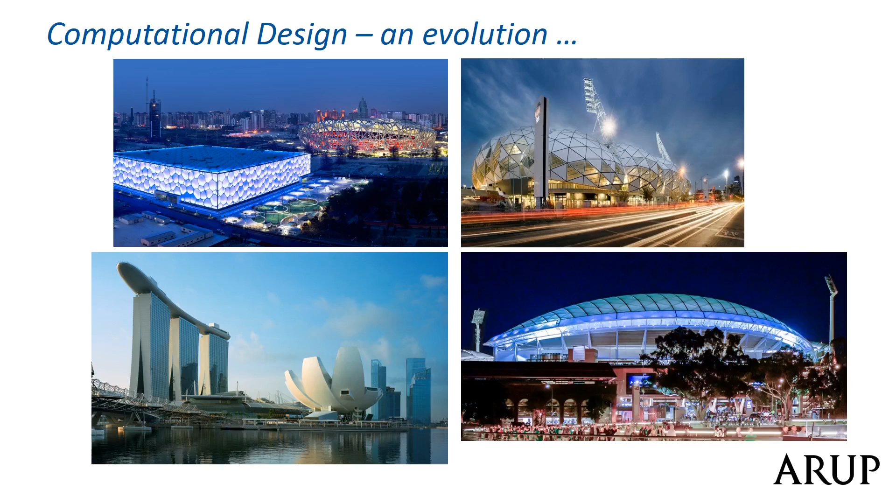There's a couple of themes that will recur through the stories that I'm going to share with you tonight. One of them is that it's just a journey. I've been lucky. This is my 40th year in the industry. I've been at Arup 35 of those years, the bulk of it in the building structure space and recently in the infrastructure group space.

The other theme is that I'm a big believer in, you call it BIM, digital twins, whatever it is. For me, it's all project delivery. We deliver projects. The tool, how you go about it, is semi-irrelevant. But I'm a big believer in what they call human-machine symbiosis. Human plus machine is always more powerful than human on its own or machine on its own. It's a combination of the two: the creativity thinking of the person, put with the knowledge and the power of the tools that you're working with to deliver the projects.

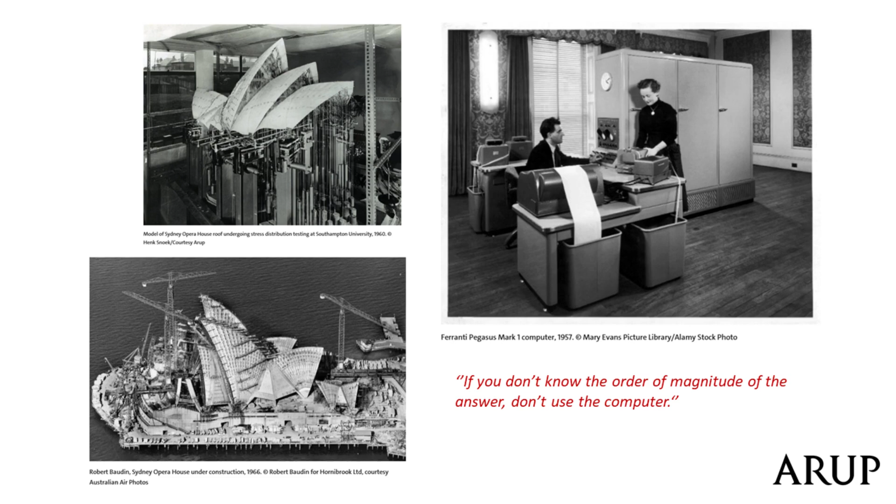So they saw, back then in the early 60s, the vision of taking advantage of the power of the computer to help deliver the Sydney Opera House. And there's a slide up there of the stress distribution testing that was done.

The projects I'm going to talk about are mostly what I consider milestone projects. There's not enough time to talk about every project that we've done, but I do want to give you an idea of the journey that we're on, because I'm a big believer, if you don't know where you've come from, you don't know where you're going.

So this was one of the first projects that we did a 3D model on. For those that are not my vintage, I'll try and explain the why in every project. When this entrance canopy was being designed, this concrete frame building already existed. It was already built. This is a cantilever structure. It's got a backspan truss that had to pull back in between all the existing columns and be tied to the roof.

We had to build a model of that, and then pass it through to analysis to make sure that the geometry fit. And that was the beginning of our journey using 3D tools, and that was in around 94.

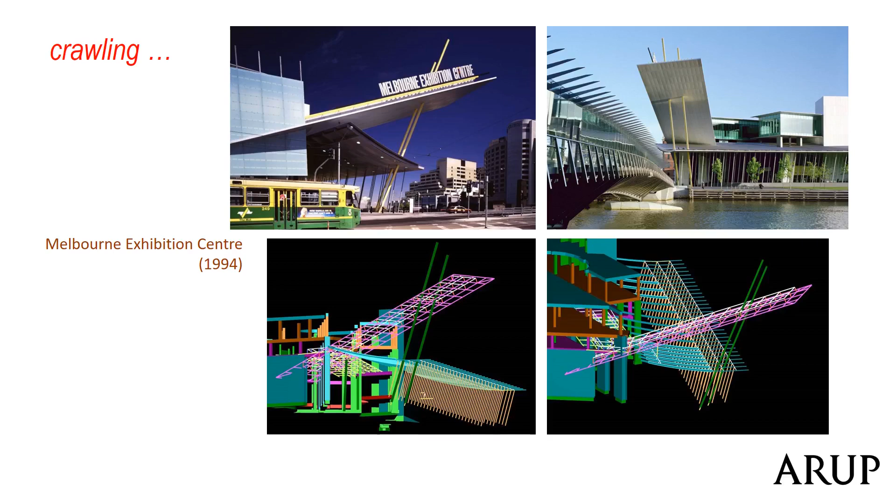Then the National Museum of Australia is one of my favourite projects. One reason being I grew up in Canberra, so this is an iconic project on a very prominent site in Canberra itself. It was also the first project we did where the architect was using Rhino.

It was also another milestone project because in those days a lot of architects did 3D models, but they did 2D CAD files. And at some point the models separated from the CAD files. This is the very first project where we flagged with them, your CAD plan or your elevation doesn't match your model. The architects came back and said the model is correct, we'll update the drawings. This was designed by ARM.

And again, for the same reason, the why. Why did we do a 3D model? It's very complicated geometry. We had to cut slices through the model, produce where the structural columns and beams and trusses need to go. And then again, we pass that on to analysis tools to do analysis with. And that's a common theme that we've used on many of our projects, and you'll see that it's all about building a model, going to analysis, and then coming back and doing the documentation.

In the late 90s, Bentley released a tool called TriForma, which is now called AECOsim. It allowed us to do a BIM model. The same thing that we do today, add data to your attributes, place a beam, column, or wall, etc. Do your reports, blah, blah, blah. It was done in the late 90s. This is a two-storey building, educational building for Victoria University of Technology. We broke even on this project, proved to be a success, and we've basically been modelling every structure in this office ever since.

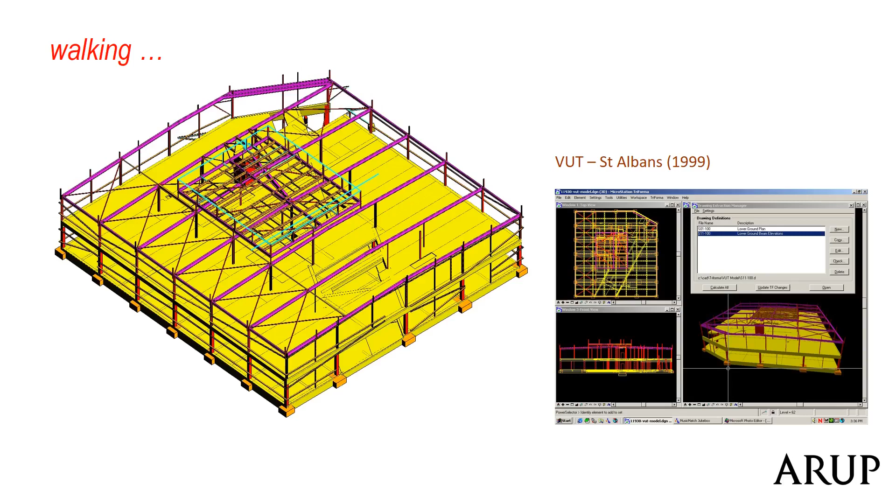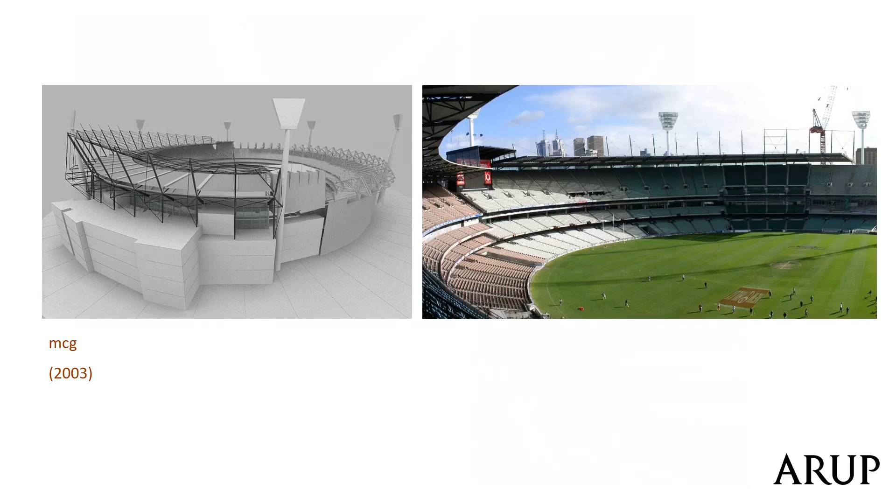Then I'll roll on to the MCG. The MCG was, I consider, a milestone project because we're one of the few disciplines, or the only discipline actually, that used the model to generate the drawings from. But more importantly, this was the first project where we started modelling the steel connections. And again, if I come back to why we do what we do, if a picture tells 1,000 words, what's the value of a model?

At the end of the day, it dawned on me ages ago that we're in the communication industry. We like to think we're in the design industry, we are, but essentially we're in the communication industry. We've got to communicate to someone, either our other design team members, or the client, or the contractor, what it is we want them to do. And a model is the best way of doing that, especially now that we can add a lot of data in those models. So this is the first one, that's the roof node at the bottom. You can see it in the fabrication yard and then out on the side.

And then around the same time in the UK, so this is the late 90s, early 2000s, this is the first time computational design was being used within Arup or within our experience. This was done with Foster's, so the next two projects were done with Foster's. They built a script in MicroStation to generate the geometry. So it's not parametric as we know it today, it's not the parametric tools where you're building a relationship model and you can update it. This is a script that they run, and if you want to generate it again, you wipe the other one and then rerun it. But it generates the same sort of thing.

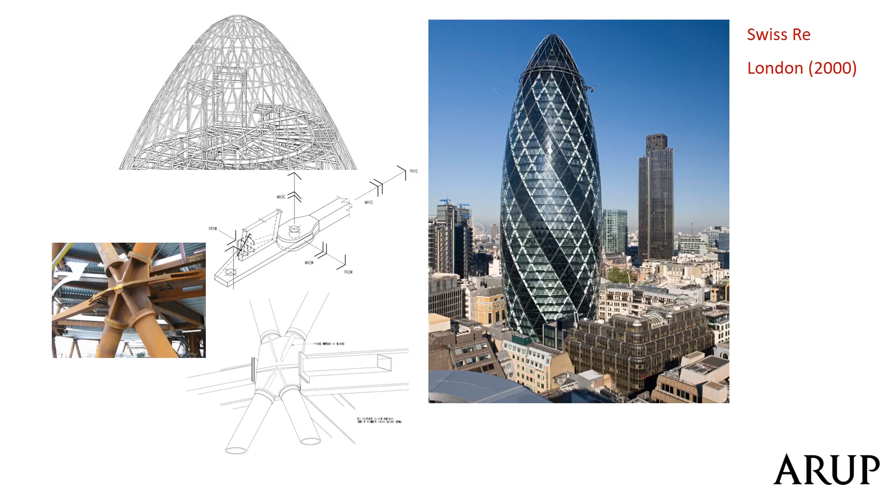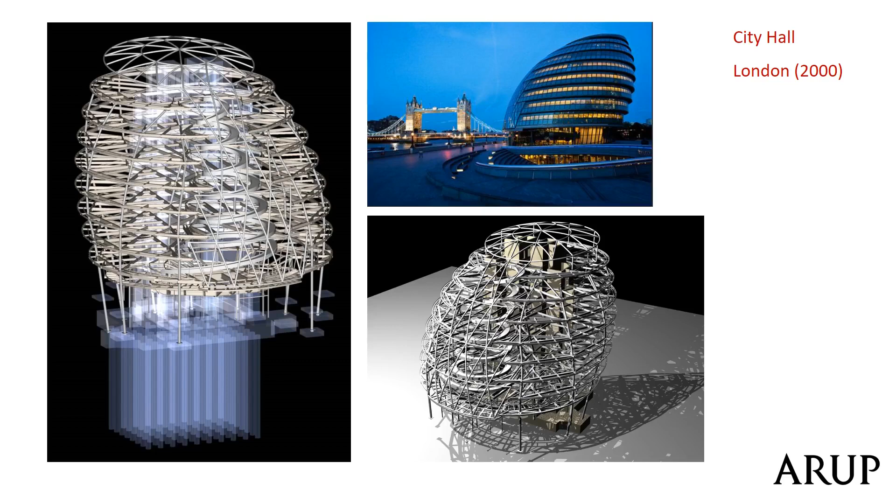The other thing that Arup did at that time was we built a Tekla model of that job. Tekla is a fabrication software. What that allowed us to do is deliver the project early, detail the connections and communicate that with the fabricator. This was done 20 years ago. We're still chasing this in what we're doing today. The next project is around the same time with City Hall. It's done around the same methodology. The scripting was done by Foster's architects, same processes as before, and then we produced a Tekla model within Arup for the same reasons. Again, back to the why.

Then around 2003, the next two projects are around the Beijing Olympic Games. We were lucky in that Arup won quite a few of those games. This is done with Herzog & de Meuron, if I pronounce that correctly. This is our first project that I'm aware of that we've used a parametric tool. And the parametric tool used on this project is CATIA. CATIA is a product that's been around since the early 90s, developed by Dassault. It's used by the aerospace industry, mechanical and other such things. It's a very powerful tool.

And also at the same time, there was a guy at Arup who's unfortunately no longer with us, John Parrish. He was a sports architect. He spent most of the 90s writing code to generate the optimal design for the stadium bowl seating. Because basically every stadium is set around the bowl: what your sight lines, your distances, your viewing angles are. That pretty much defines the criteria for a bowl. So John Parrish wrote a lot of scripts and coding before he then went into the parametric tools to be able to regenerate bowl seating arrangements, 50,000, 60,000, all that sort of optioneering.

Then the roof structure itself, as I mentioned, was all done in CATIA. It's quite busy, but really it's a fairly simple project. These are portal frame trusses, and then the rest of it is just placed there so that no one can read what the structure's doing.

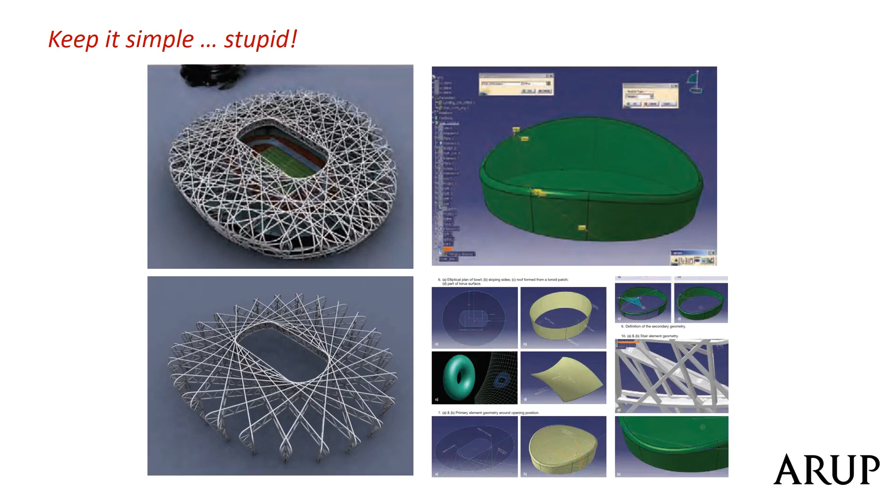CAD, because CAD is used in the mechanical industry, you can generate your geometry and then create true or developed shapes, which is what they did. So they produced the drawings out of CAD, and they could generate the true envelope of the steel plates. They did a lot of prototyping with the welded connections there. You can see that there. They proved that it worked. Once they were satisfied with it, then they ran with it through the job.

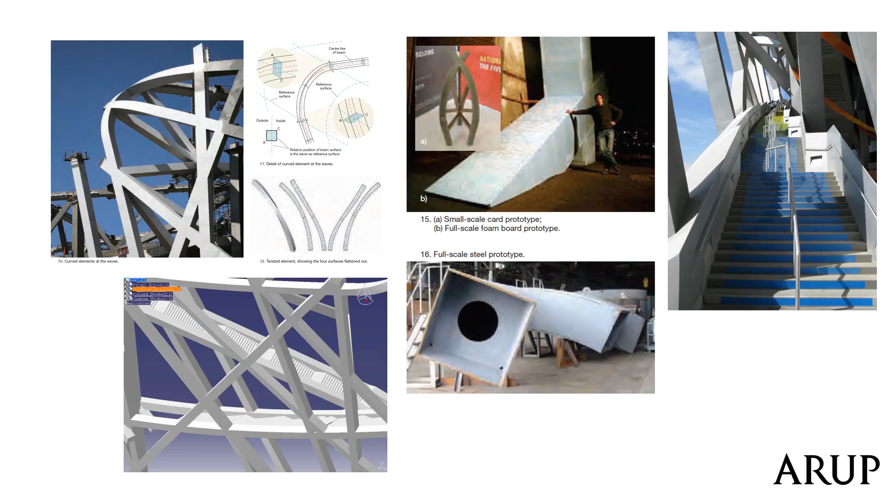And again, the same challenges that we have today is that these tools at that time allowed them to play around with all those options. The Water Cube. The Water Cube was done by a Sydney office by Steve Downing and his crew up there, for those who know. Again, this competition, this was done with PTW in Sydney, and they won the competition in 2003.

The geometry behind it is quite clever. Soap bubbles or bubbles is quite a strong structural form. They took the concept of bubbles within a foam environment, and they cut it at an angle, a slice through it. Then they had two skins, one for the outer skin, one for the inner skin, and then the bubble lining itself is made out of ETFE, and it was pumped with air. So it was actually a way of creating a structural frame, both inner and outer, but also acted as the insulation for the heating and cooling of the building.

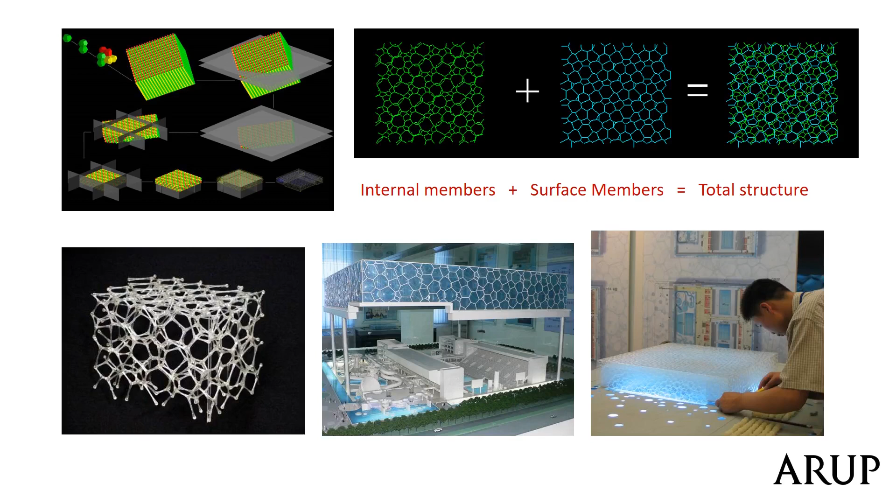You can kind of see there, it was early days, but they created a 3D printed model, and you can see quite a lot of the model there. Very impressive. Now the workflow, again, this is a milestone project for us because they did a lot of coding. All this was done in MicroStation. They linked it to analysis, and then they brought the analysis data back into a MicroStation model, which they automatically generated the drawings on. What this allowed them to do was quickly turn around a lot of different options.

Again, it's not a parametric model in that it's linked, but it's done through scripting. So you clean the model, redo the script, create your drawings, look at your options. So you can kind of get a sense for what it's doing. The optimization routine that they developed for this, so an optimization routine is an iterative process that runs through all the members to try and refine the design down to as optimal as possible. This optimization routine is still being used and is being rolled out into a lot of the projects that I'm going to show you after this.

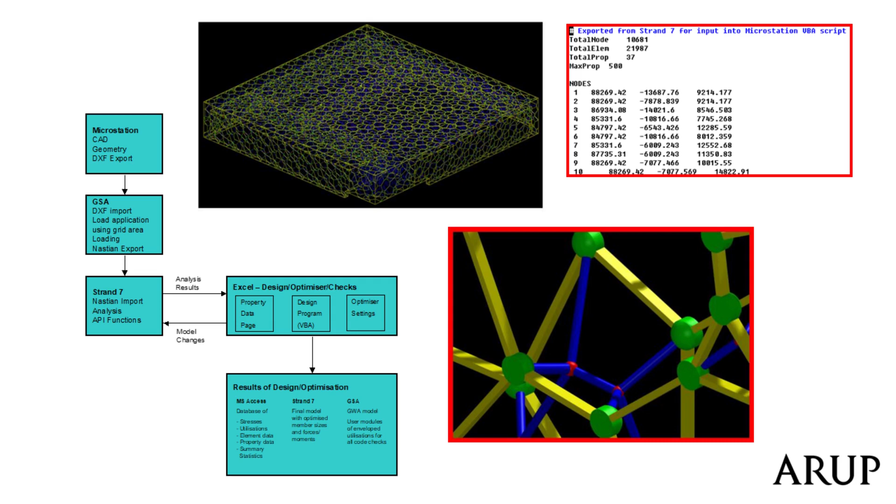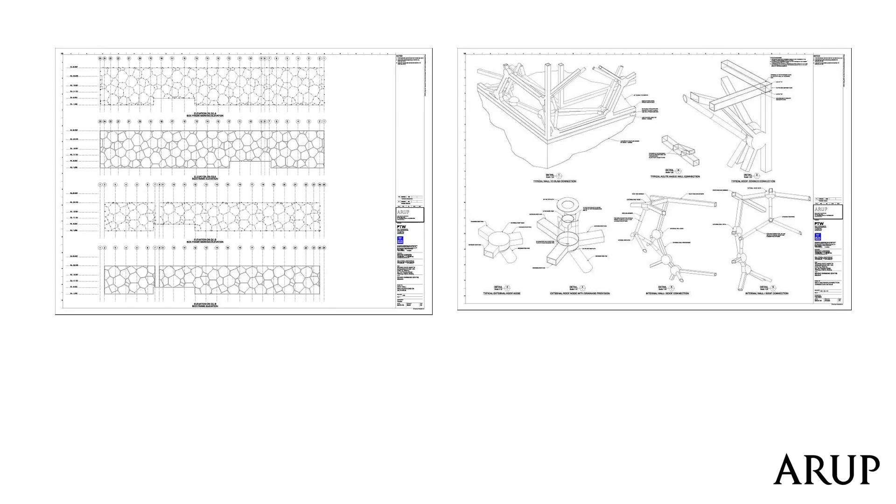So again, I'm trying to emphasise that where we are today is on the back of what was done before. We just keep refining and improving it. That's some slides and scripts. It's also, again, the value of having the data or the model. You can pull that data out and start doing some testing and studying on it. Some examples of some drawings, just some images of the project on the site.

The next one, this is Marina Bay Bridge, double helix bridge, done out of the Sydney office again by Steve Downing and his team. This is the first project that we used a proper, what I call a parametric tool here in Australia. It was done using Bentley GC, which was released about 2004. This is a double helix bridge, but effectively it's designed as a tube. A lot of the optioneering was done in CATIA, form finding. Then when it was rolled out to project delivery, it was delivered using Bentley GC. There's an image on the right there of the GC noding, which, for those that are familiar with Grasshopper, is a very similar sort of context.

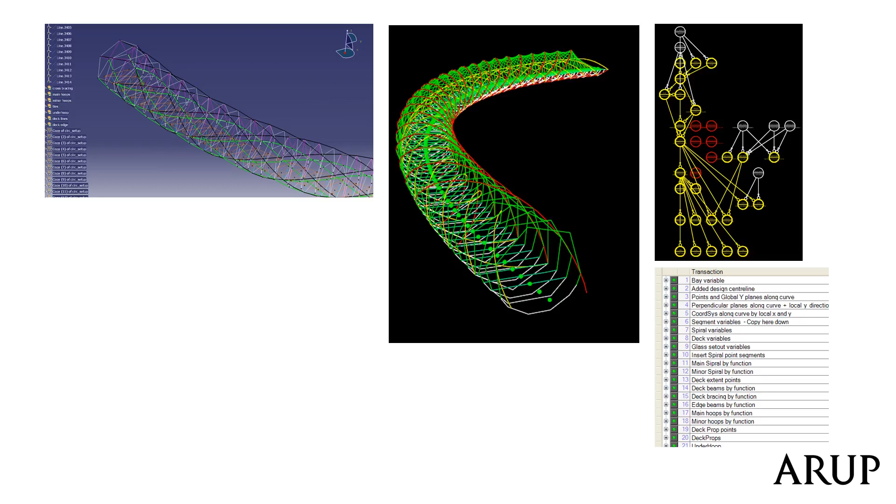I think the best description of these graphical or visual programming tools is relationship modelling. You're building a model that has a relationship between 2 points, which when you connect them, it could be a beam or a column. Geometry starts to become irrelevant, where the X and Y and Z you can plug in later, but you're just capturing that relationship between all those objects. And then when you build on that, and build on that, you get the powerful tools that we've got today.

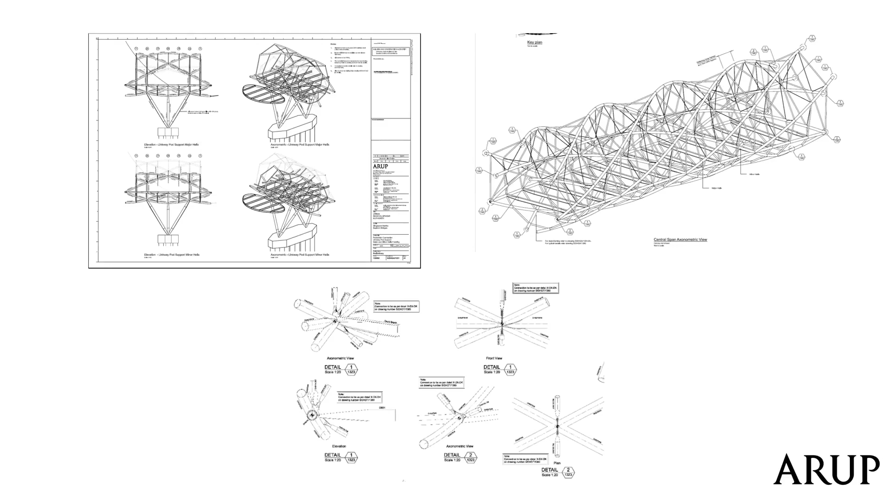Just some images of the different geometry options that they explored, and then the model that was used for documentation. Same sort of concept, and again, this was done back in 2004. 3D steelwork connections, as you can see. And then, like today, take data out of the model, start doing reports, doing your comparisons, blah, blah, blah. All the stuff that we kind of take for granted.

AAMI Park. I'm a sports tragic, so I've been lucky enough to work on a lot of stadium projects. I also played rugby as a kid, so big fan of this project. It's the first project we did here in Melbourne using GC. Again, the early concept work was done by Dominik Holzer, for those in the industry, at Melbourne Uni. He was a PhD student with us at the time. He did a lot of the concept and form finding, working with Tristram Carfrae in Sydney.

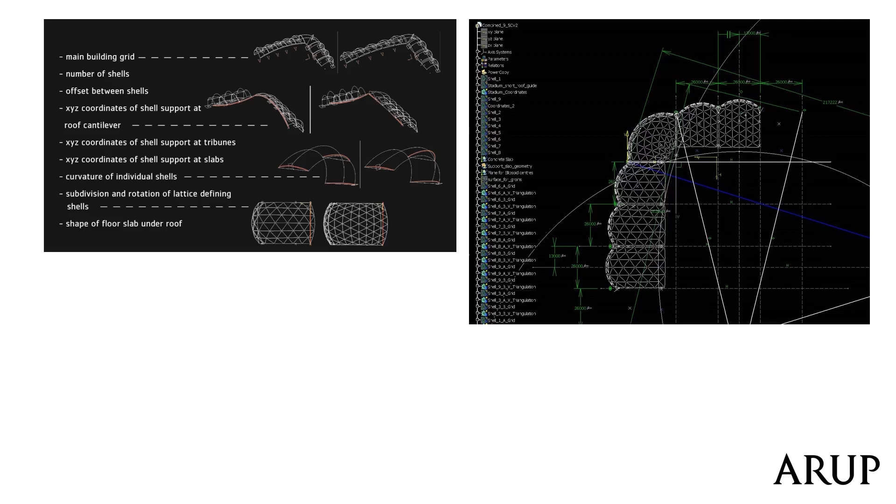When it came to project delivery, we brought it into GC and built a parametric model for 2 reasons. Why? We wanted to run some optimization studies for the geometry, but mainly we also wanted the ability to pre-camber; all steelwork structures have a pre-camber. Every node is connected to another node, so when we wanted to raise the lip of the roof to hand over to the fabricator to do their steelwork shop drawings from, we wanted the ability to raise that roof quite quickly. So we built the script that allowed us to do that.

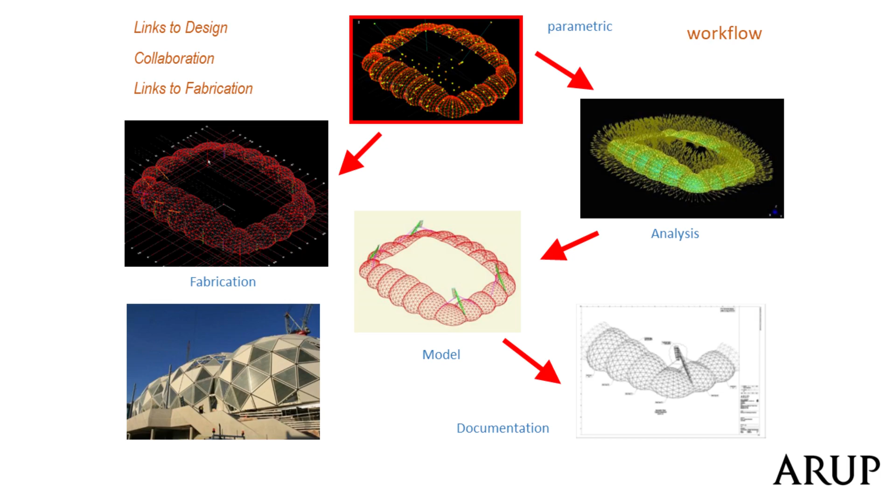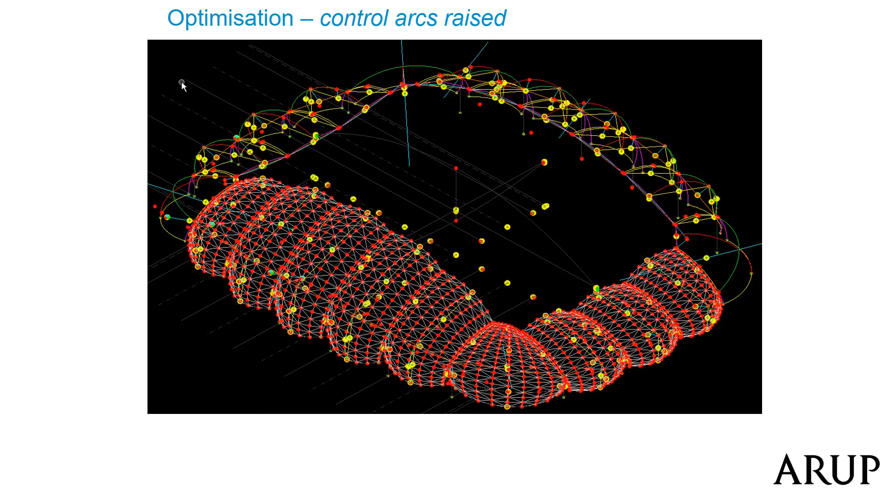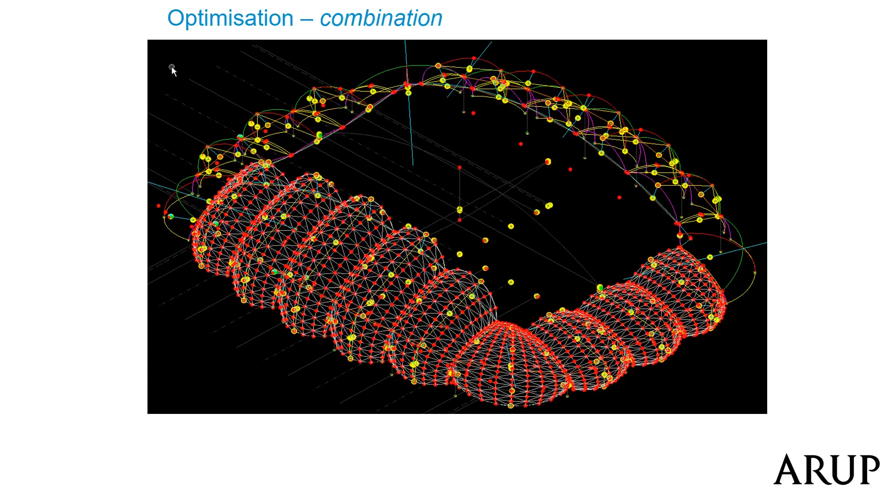Some examples for those that haven't seen parametric tools used, I've just done some exaggerated slides of playing around with the different geometry. So you've got the shell raising, the individual shells being raised, and then a combination of both. Having that allowed us to run all those different options and spit out a text file, which we could then map. We had a programmer map it to the analysis tool, so we could spit out 18 different geometry combinations in minutes, and then the analysis would run overnight. We'd make a comparison of those things, and then run another case study of the best combination of both.

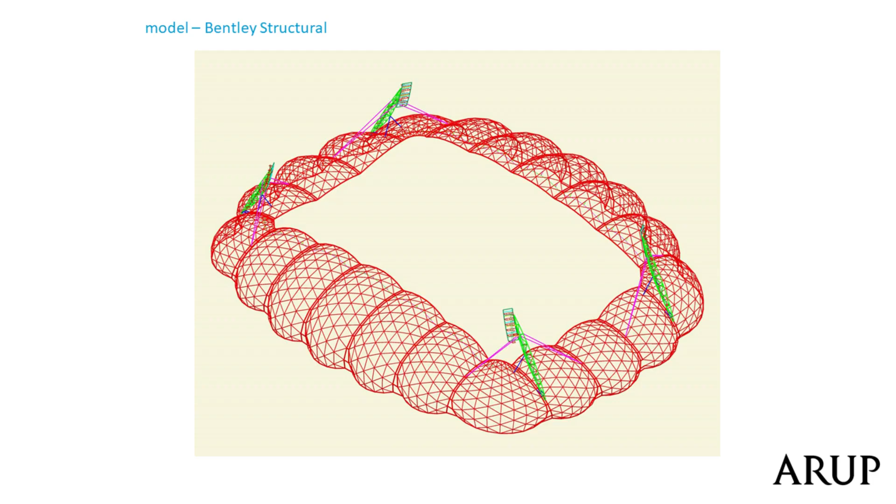So that's an image of the analysis model, and then this is the Bentley model that we used for documentation. Same thing. And then we handed over the preset model, gave it to the contractor and the fabricator to start working from.

The next milestone project is Marina Bay Sands. This was done in conjunction with Moshe Safdie Architects. It was one of our first global projects. It was 3 55-storey towers, convention centre, theatre, ArtScience Museum. A lot of the optioneering was done parametrically and done here in Melbourne. When it came to detailed design, it was done out of the Hong Kong office, the Singapore office, of course, and the ArtScience Museum was taken to construction here.

I'll go back to this model. I still say to most people, if someone walked in today and said, can you do this today and do all that fabrication-accurate model to give over to the contractor, I kind of go, holy hell, how am I going to do that? And this was delivered back in 2007. All the steelwork on this project was handed over to the contractor for the fabricator to just finish and do the shop drawings. All the geometry was set out in our models.

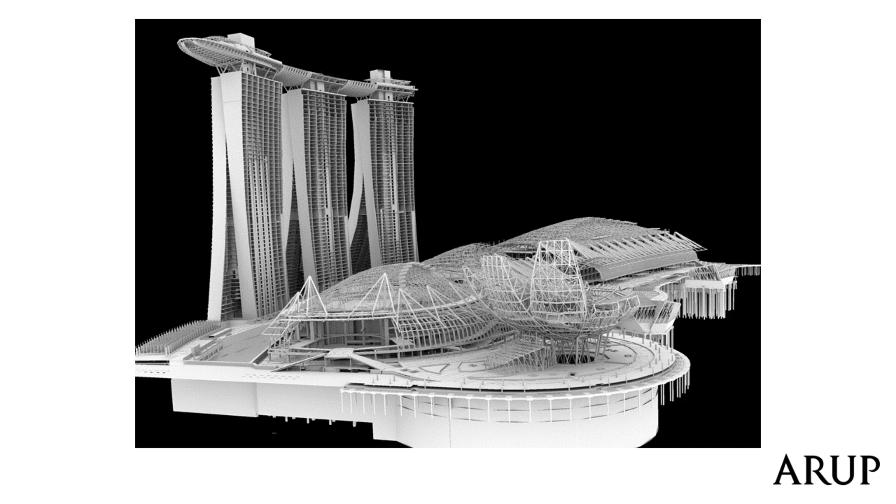And the main reason, if I go back to the why, was this project. The ArtScience Museum, which we did here, was fully parametric. Again, a couple of reasons why. Imagine trying to do a set-out drawing or convey that information to the shop detailer. Can you go build this model if you don't give them a model? It wasn't possible.

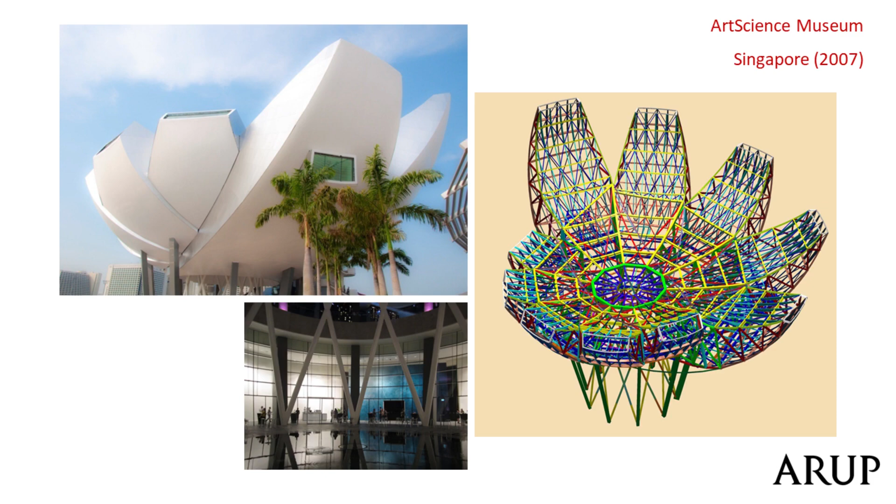When we started this project, just some more images. Basically, that's 10 storeys high from the base of the diagrid to the palm of the lotus. So it's 60 metres in the air, or 30 metres in the air. This was the concept we were given when we started this job. Jim Pay, for those in the office, is a guy I worked with for a long time. This is one of his first jobs. He had oranges and a banana, and he decided that the lotus looked like that. This was the sketch that we started with.

We had 3 months to go from that sketch to a full model, design analysis, and go to tender. And then we had another 3 months to refine that model and then hand it over to the fabricator and say, go build this.

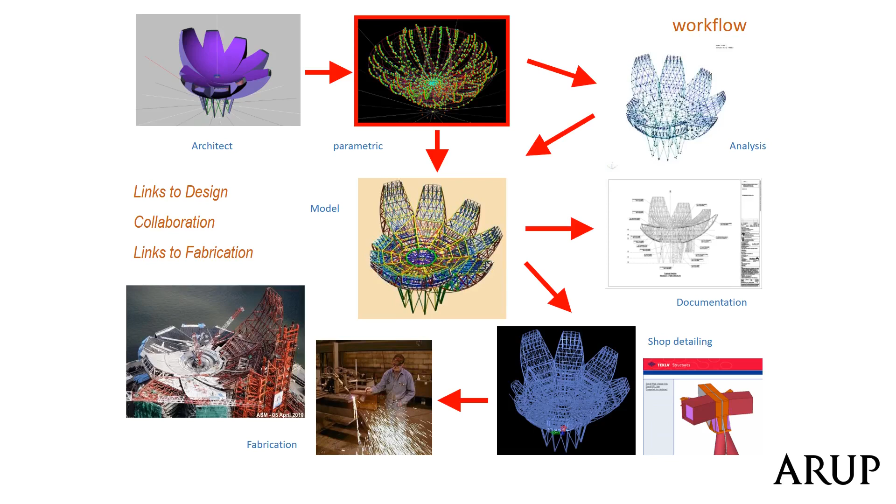Quite a challenging thing. We built a federated, back in the day, GC, Bentley GC's, it was 2 gig of RAM it could run on, and then it would crash. So we basically had to do the whole thing in federated scripts, essentially. So we had a script to define the primary geometry, then a script to do each finger, then a script to do the diagrid, and then etc., etc.

The beauty of the scripts, as you hopefully all know, is you write a bit of code or you write a script, you prove the logic for one, and then you can reapply it on the 10 fingers or the top of the model surfaces or whatever. So it's quite repeatable.

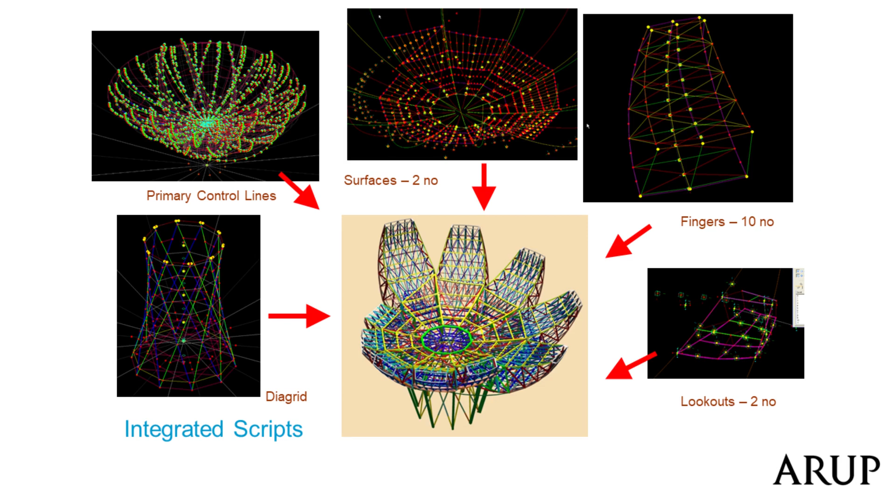The architect developed all their geometry, they did everything in Rhino, even all the drawings. It's probably the most perfect Rhino model I've ever seen. Had the tiles in there, finishes, handrails, the whole caboodle. Very proud of this job. These are some images of the federated scripts and then the combined model. Some images of the architect's model, the analysis model, the Bentley model, and then some of the drawings.

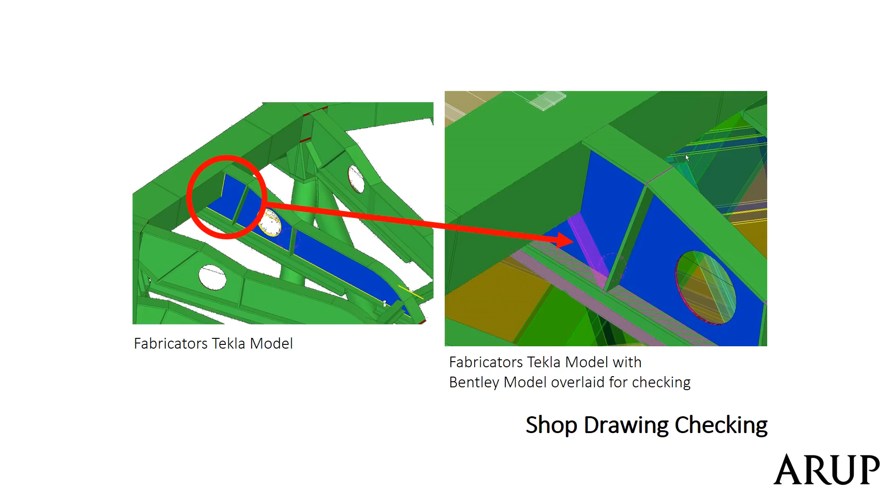Obviously, we went through a lot of design iterations with this project. And then what we did was we went from Bentley over to Tekla, handed over a Tekla model. The beauty of handing over a Tekla model to the contractor, and we've still come back to that thing today, is that when we get their model back, we can easily run comparisons. And it saves in shop drawing time, saves in review time, etc. So there's huge advantage in that, and that's something that we're still chasing today. Some examples of the construction and the final product.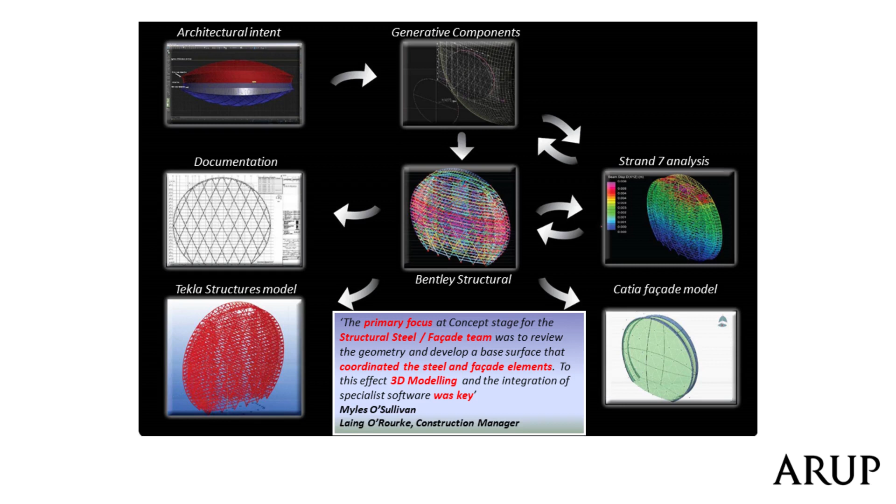Now I'll talk about a couple of other projects. So this is Aldar HQ at Abu Dhabi. Similar sort of workflow, going into 2008. GC model to define the overall geometry, take it to analysis, from analysis to a Bentley model, from the Bentley model to a Tekla model. The Tekla model was handed over to the fabricator with connections. And the facade for this project was done in CATIA. And that's 12 years ago.

Just some examples, some of the drawings, some of the Tekla model. Same logic as Art Science Museum, being able to compare the model with the model you get from the shop detailer.

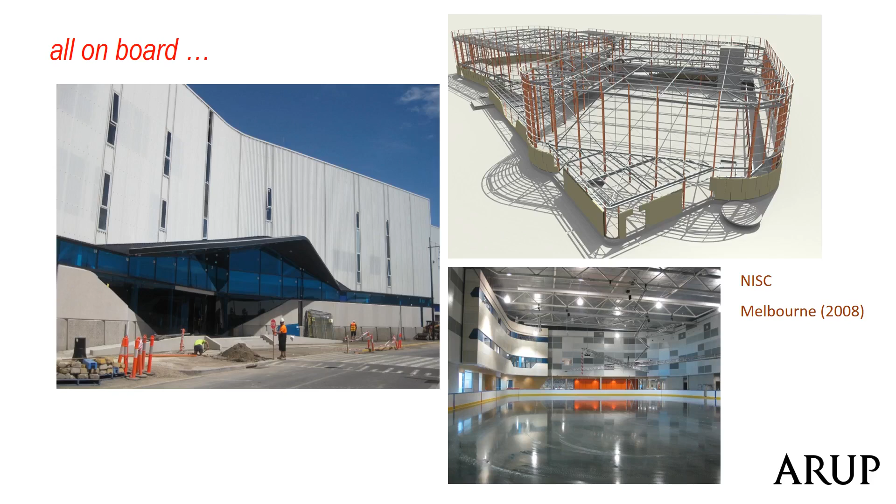We built a parametric model because the project was awarded in November 08, and then it had to be delivered in 15 months' time. We had to start design and hand over a model to the shop detailer so they could work on it over Christmas, so they could put piles in the ground and erect the columns in March. So when we started this, we didn't know what the truss framing arrangement was, what the column sizes were, any of that information. It was early days. So again, we worked on a relationship model, we built that relationship, and then when we got that data, we were able to put that into the model and turn it around.

This was also the first time that we were able to model. The tools allowed us to model the objects, beams, columns, walls, using the parametric tool. Previous to that, we were running scripts in-house. We'd written code to be able to pass from one tool to the other.

Then I'll roll into Adelaide Oval. Again, I'll talk about milestone projects. This was done with Cox Architects. So you can see, hopefully, a lot of that early work was done with CATIA and Bentley GC. Grasshopper was released around 2007, 2008. Architects started using it. Our engineers started using it more. Engineers take to Grasshopper like ducks to water.

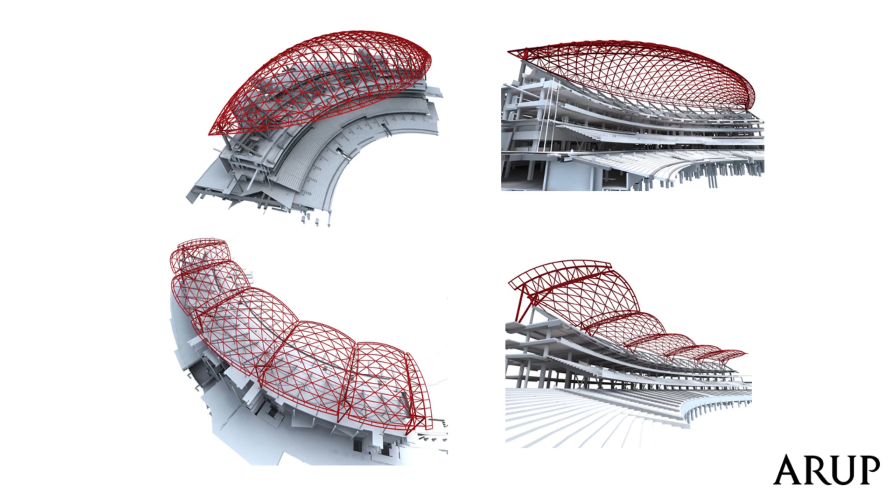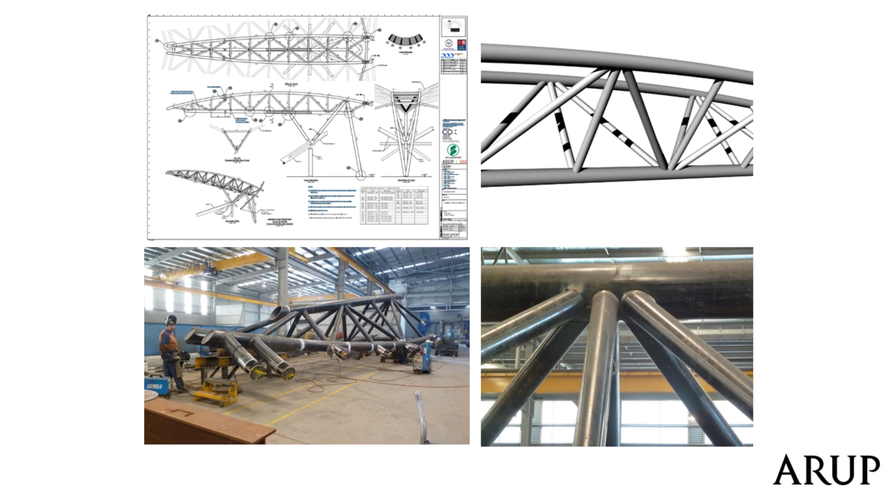Just some slides of the two roofs. Again, all of them done parametrically. Some examples of just some of the drawings and the fabrication. The other thing I wanted to mention, all those optimisations from the Water Cube went through AAMI Park, and then onto Adelaide Oval, and were reused on Adelaide Oval. Just some more examples of the model, the drawings, and the fabrication.

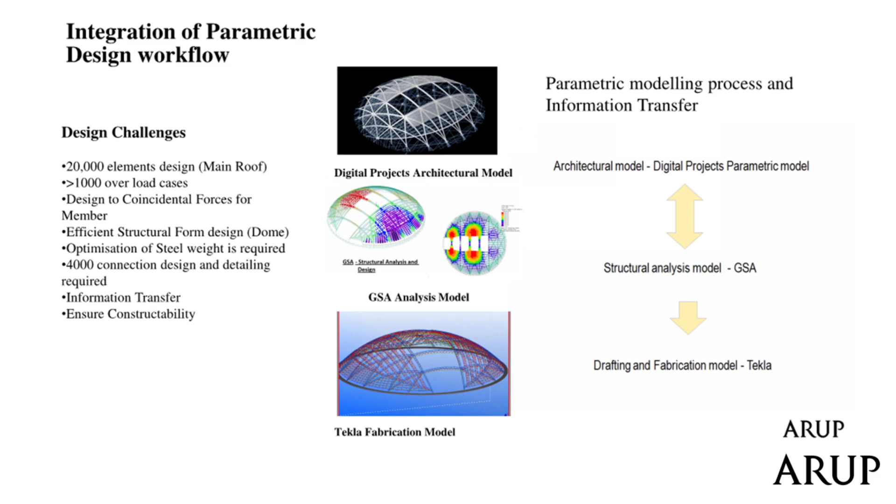I'm going to talk about the Sports Hub. This is the last kind of old project that I'm going to talk about. The Sports Hub was done using Digital Project. Digital Project was developed by Gehry Technologies, which is obviously part of Gehry's architectural practice. It's based on CATIA, so it's an engine that runs on CATIA. Arup have used it on a lot of projects, Sports Hub being one of them.

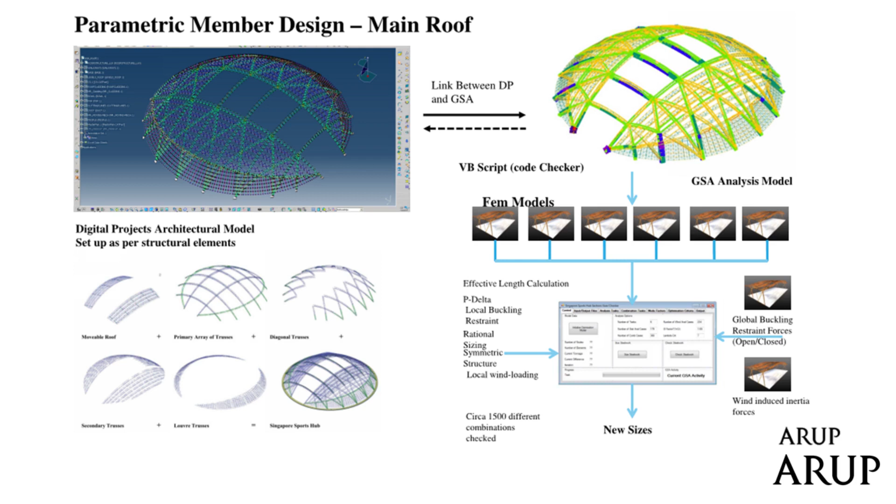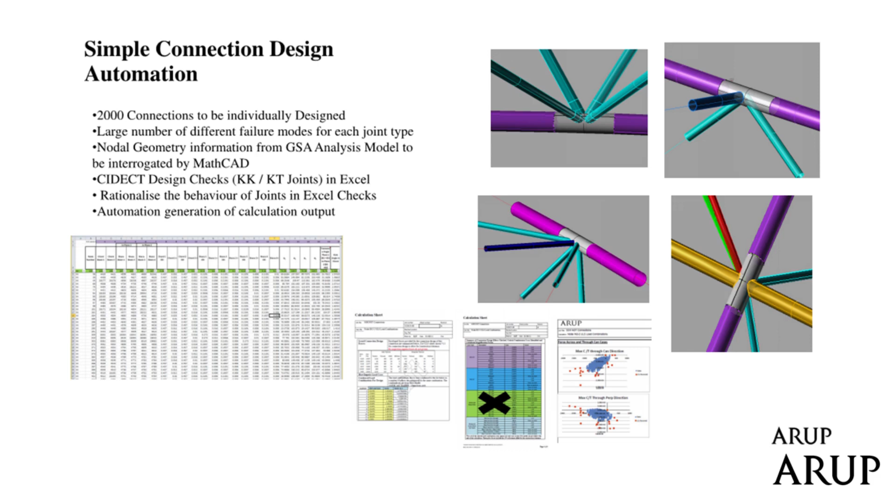So again, similar sort of workflow: parametric model, take it to analysis, from analysis to a Tekla model. Just some more images showing the workflow. And then we did a lot of studies with rationalisation of the connections and also the member sizes. And again, that same optimisation tool was run through here. This is something that we're still chasing today, and hopefully Rhys and Josh might talk about that. Just some more examples of the analysis for the connections.

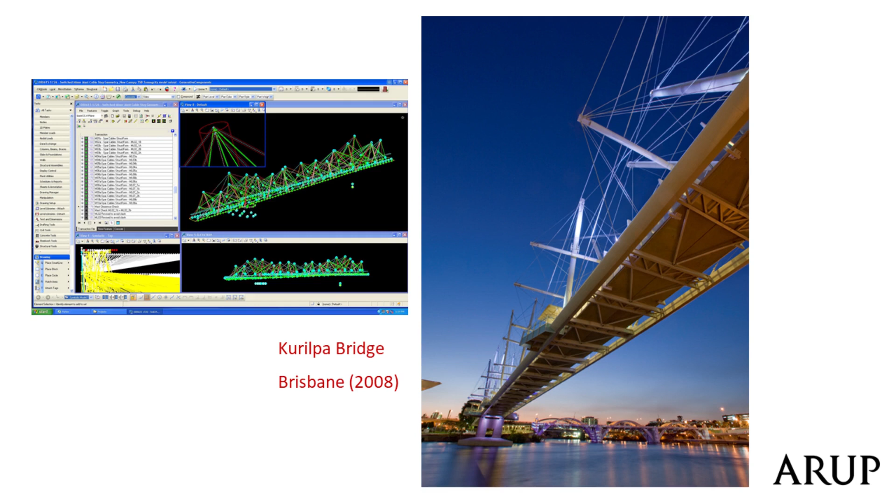Again, why did they use a parametric model? Because they had to play around with the geometry of the masts and the cables to make sure that they got clearances and didn't clash, etc. Again, passed to analysis. The next project I've shown because a lot of the projects I've shown are stadiums or what you might call sexy projects. This is 2 kilometres of piled retaining walls done in 2008 for a project with John Holland, a grade separation project at Nunawading Station.

You build the script, you tie it to the rail alignment, you tie it to the existing ground. We didn't get the information from the geotech until one day before we actually issued drawings. It was an accelerated program. So you build the logic in the script first, then when you get the data, you push the data in, which allowed us to push out the models quite quickly and then generate the drawings and the schedules. This program ran ahead of schedule and was very successful.

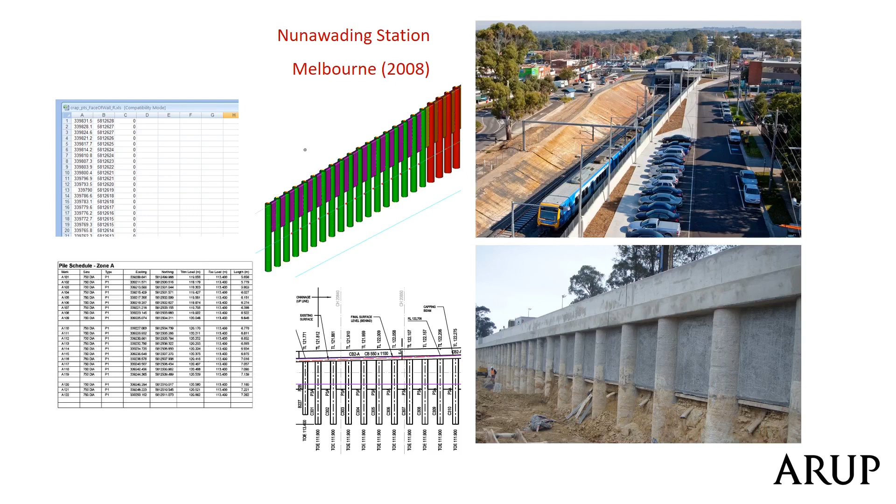So I try and push the message that these tools aren't just for your special projects, they're for every project. You can take advantage of it. We did some tunnel studies for the Airport Link in Brisbane in late 2008. Fast forward, we've got the Elizabeth Quay Bridge done by Clayton here in Perth, Grasshopper to Tekla, same sort of workflow: to analysis, Tekla, and then drawings. In recent years, I'm just going to talk about what we've been doing since with the bridge team, which is Swan Street Bridge.

This is my first bridge project, I guess. Obviously get a nice easy job to start with. It's got 76 steelwork fins each side of the bridge, 152 in total. The concept, the architectural concept, is a little bit like oars in the water. Their length varies and their depth varies based on an algorithm that the architects came up with.

The road geometry and the shared user path geometry kept changing, so we tied the geometry of the bridge and the fins to that geometry, so when we could deal with those iterations, we're also able to generate all the data that went to fabrication out of the model.

It was also one of the first projects where we used a point cloud. Melbourne Water were quite insistent that the new arches that were put in match the profile of the existing arches that were removed on the outer edges of the original bridge. All the geometry on this bridge was done parametrically. All the set out information was extracted from those models.

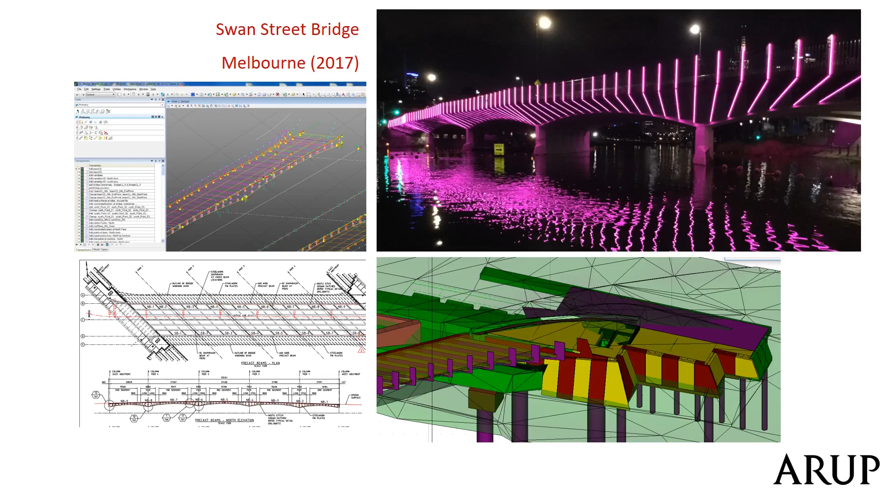Probably something I haven't mentioned, if I go back to the why with Arup or with OVE, is it's all about delivering what we're doing. I'm not a big believer in spinning wheels for the sake of spinning wheels. We use these tools to be able to help us deliver a project.

So in recent years, I've been on the Western Program Alliance for the last 18 months. We've basically, in that time, been able to change how we go about what we do. We're now doing all of our bridges parametrically, generating all our drawings from the model and generating data from that model. We've delivered to detailed design 4 bridges so far. 2 have completed construction, 1 is under construction and 1 is about to start construction.

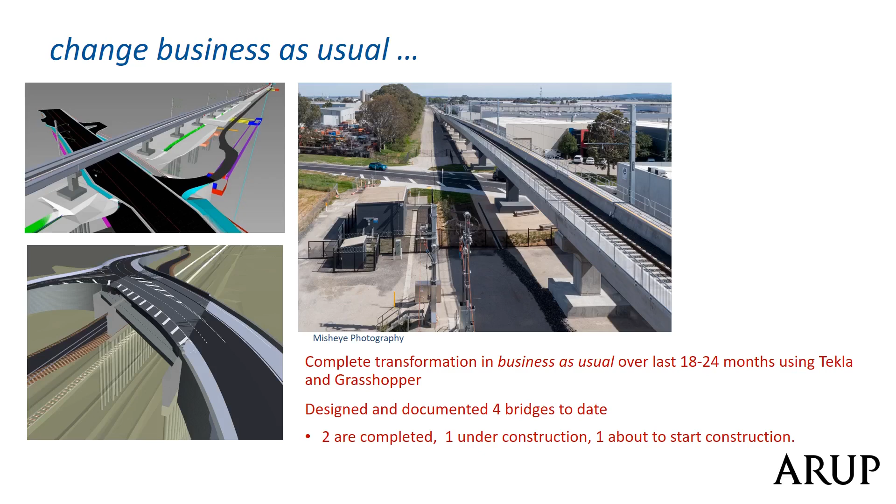Last year for us was a lot. I'll go back to, so this is the first project and the second one. And these are completed. Just some slides. Why parametric? For the same reason that we did it in buildings, because we extract the drawings from it, we extract all the set out data. It helps us deal with the iterations that happen through the design process. The same logic that we use in the building space.

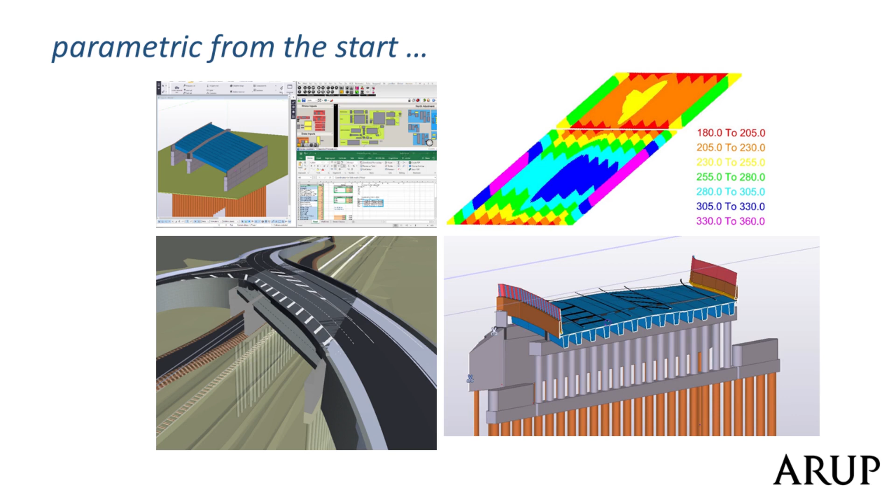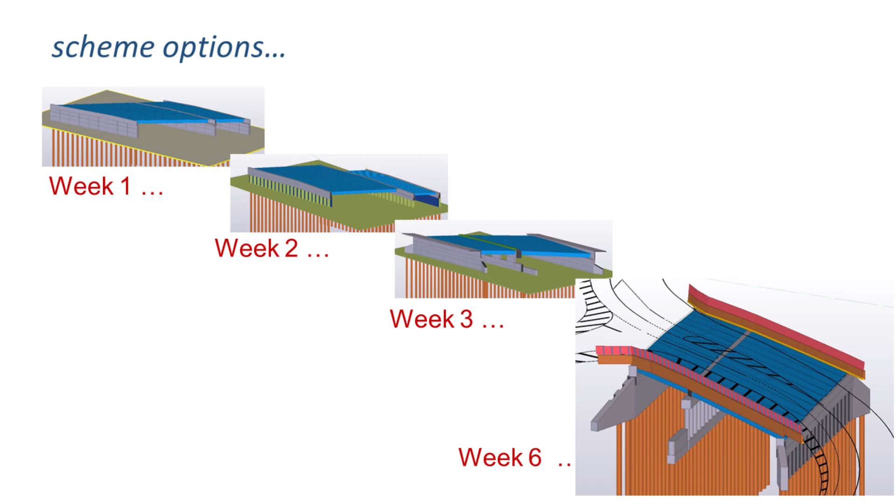And it also gives us the ability to do a model from the start. The value of being able to create a model at the beginning as opposed to traditional methods is enormous. And the project team and the alliance are gaining from the benefit of that. So this is just an example: week 1 it looked like that, 2, 3, 4, 5, 6. Went through many iterations in the early stages and then even through the detailed design stages.

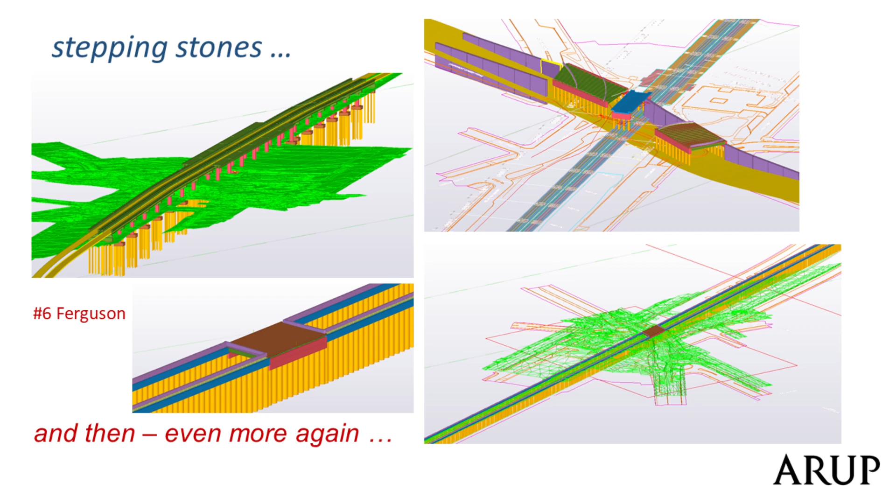Last year was a lot of options for us. We were able to turn around probably 30 odd different bridge options on 6 or 7 different projects. We're about to start detailed design, or we are in the middle of detailed design, on about 6 or 7 structures. So by the end of the year, a lot of these structures will be built.

Again, the same logic for why we do something parametrically. You build a bit of code, you write a script, you build a parametric model, you can reuse it, tweak it a little bit over and over again. So we're able to generate a lot of these options quite quickly. And I'm looking forward to taking these to detailed design and 3D construction.

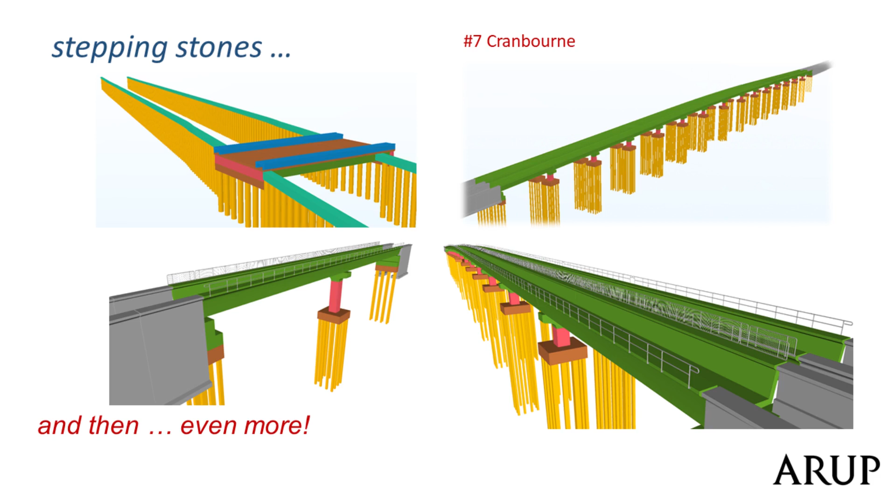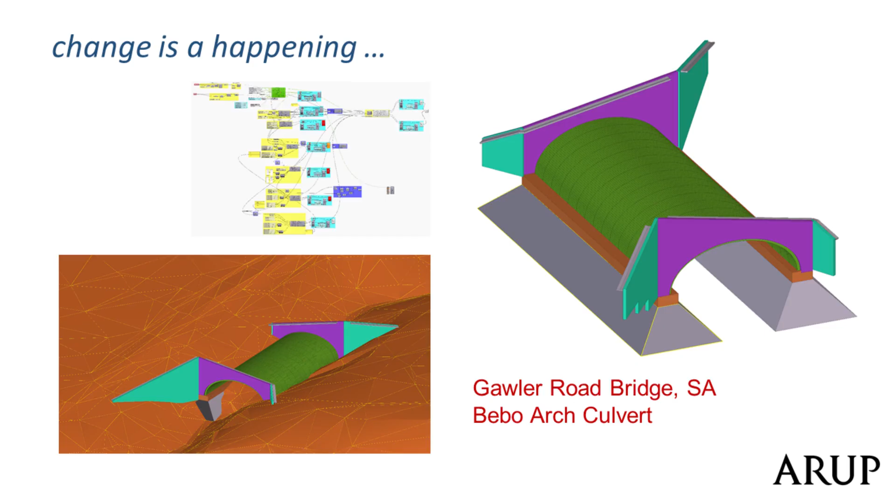This bridge, the bridge that I was talking about, is under construction. This was also 3D reinforcement models we've been exploring. I'll talk about that later. Just an example, the culverts. I'll just show some more bridges that we did. Options.

The rest of the rail infrastructure, we're using the same tools for doing our overheads, our gantries. Build a component, run it through a script, go place it, bang, bang, bang. It doesn't matter whether it's 1 kilometre long or 20 kilometres long. It takes the same sort of effort. We're also in the process of trying to automate that workflow.

I'm going to finish up with a couple of what-ifs, if you like. Last year it dawned on me, and I'm not sure how many people are here in the infrastructure space, but in the last year and moving on, 5 different software houses have been developing parametric tools for bridges.

You've got Tekla, you've got Sofistik and Revit, you've got Bentley, you've got CATIA, got their own bridge tool, and you've got Allplan. Allplan is from the same company as ArchiCAD. They also got Solibri and Bluebeam. So these are all very powerful people in the industry, all exploring use of parametric tools. So you can kind of get a sense of where they're thinking and what they're doing.

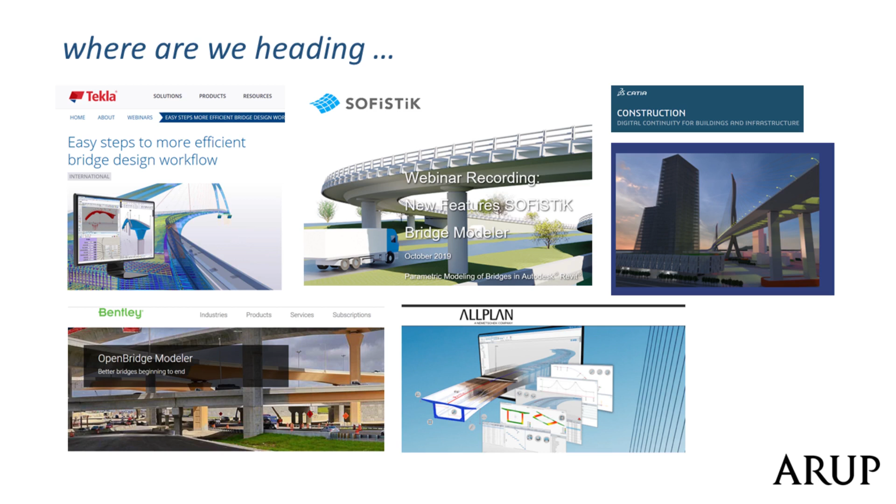I get a bit wary when people say they can write one tool and it'll do every bridge and every combination and whatever. I always found that it's at the margins where things are different. Yes, you can use a script to get you 80, 90%, but the devil's in the detail. I'm not sure that there's a one-size-fits-all approach, but we'll see how it goes. But that just gives you food for thought about what people are thinking, and there's other people playing in this space. What are the opportunities that we're exploring at the moment?

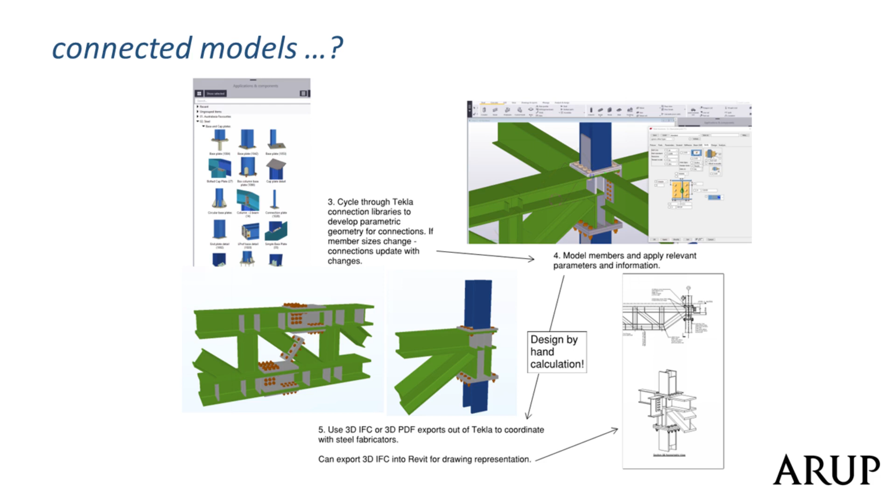Connected models. So we've done a lot of work with Tekla, but what if we were able to automate the connections? That's one thing we're exploring at the moment, and this has been done on a few projects. These are some images of the new rugby league stadium which has just been opened in Townsville. 3D reinforcement.

It's the holy grail for me. I know it's not very exciting for most people. Steelwork models we've been doing forever and a day. Reinforcement models, huge opportunity. Again, I should get a slide of the drawings for these and then compare the drawing to the model, and I think you'll get it. Again, if a picture tells 1,000 words, how much data does a model do? The beauty of these things is you can treat them like a component. We can use the parametric tools to place them. All of a sudden, we can do a bridge, do a lot of options. It's very, very powerful stuff.

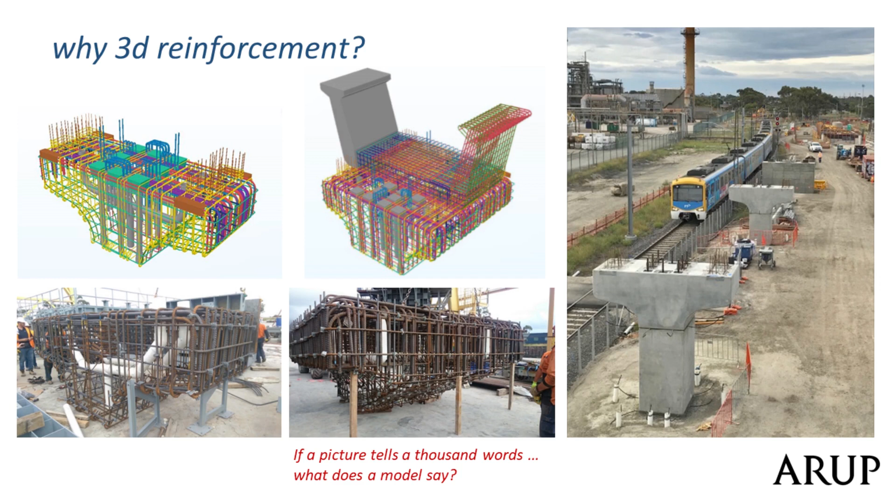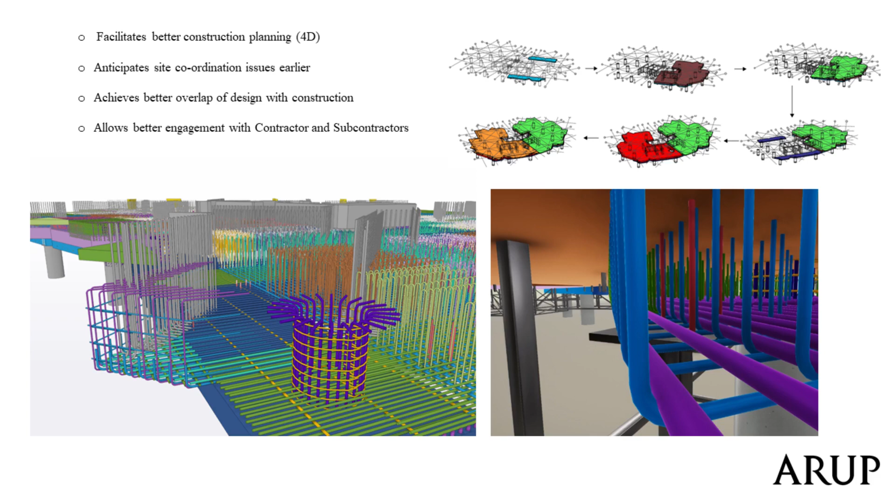This is an example of one of the rail bridges we've done where we modelled all the reinforcement. This is some work being done by Joseph Tang in the Brisbane office for ProBuild, where they did a 3D reinforcement model for I think a 1.5 metre deep transfer floor on a tower in Brisbane. Very successful. Tell him he's dreaming. I've been working with drawings, as I said, for 40 years. If I could get rid of them tomorrow, I would.

I've got a colleague, and he and I share a similar view, and his lament is, John, why do we keep using the latest, greatest tools and then dumb it right down to make it look like it was on the drawing board? I go, yeah, I share your pain. So, I'm going to talk about this project. Can we deliver without drawings? Well, we have, and we've done many examples of this.

This was the travellers' sculptures on the Sandridge Bridge down at South Bank, done in 2004. It was schemed by an artist, who provided us with a CAD file. Obviously the fee for this sort of project is not that large. Can you do drawings for each of those sculptures? Yeah, maybe. Would it cost you time and effort? Yeah, it did. So we talked to the fabricator, we got a programmer in. We asked them what data they needed to fabricate it. They said, we just need an Excel file.

So we had a programmer take the CAD file, rationalise the geometry to a series of arcs, do the analysis, and then write that geometry to an Excel file, and then gave that to the fabricator. And lo and behold, they're up. Really happy with our outcome. Quite disappointed that that was done 16 years ago, and it's still not business as usual.

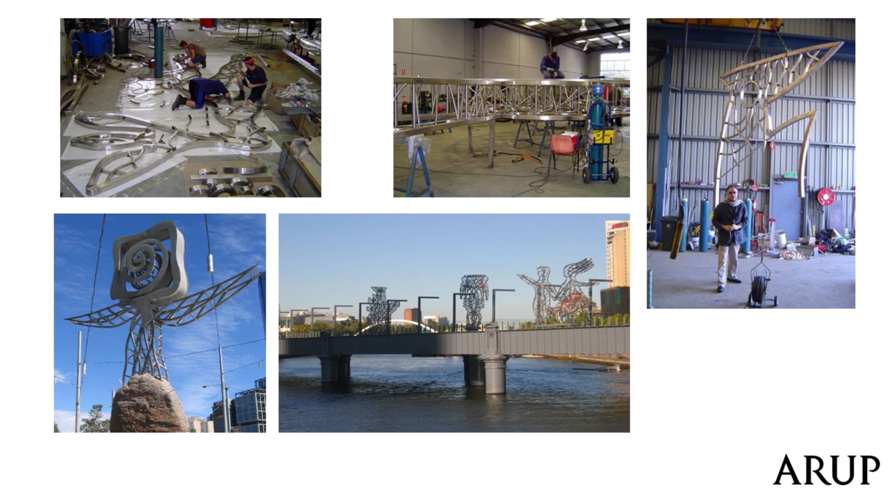Perth Stadium, I'm not going to talk in detail about, but we developed a Tekla model for this project from scheme design all the way through detailed design to construction. We talked to the shop detailer, who was also using Tekla, about how we could make it easier for them. This was fast-tracked, so the west quadrant was delivered before the east and south quadrants, like most big projects. We also started shop drawings before the design was finished, before the mechanical penetrations were known, before the architecture was finished, even before the structure was finished.

Classic large project. We talked to the shop detailer and said, how can we make it easier for you when we issue you a new model? They said, can you add attributes in your model that tell us what's changed, at that granular level of detail? So because we were using the same tool and embedded data in our model, every time we handed a model to them, they could run filters and tell what changed, what was new, added or deleted, and whether the size changed or shear studs or whatever it was.

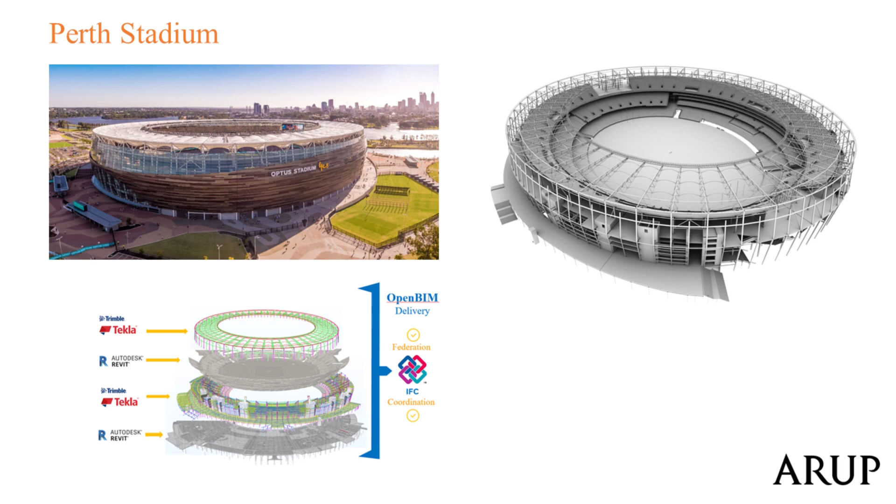It basically made the drawings irrelevant, and that's the key message I took out of this project. Yes, we delivered drawings because that's a contractual thing, but the fabricator and shop detailer did not use them.

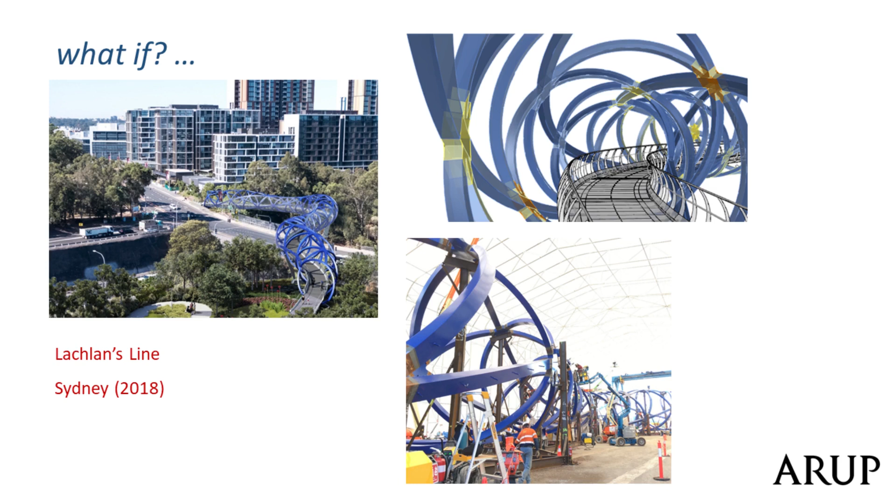Then I'm going to go to a what if. This is a bridge project that's just being erected in Sydney as we speak. I'm not going to go into detail about this project, but it was done Grasshopper analysis to a Revit model for documentation. But the key message for this was they went to fabrication, Grasshopper, IFC to the fabricator.

So just think about that. You don't need to go to any other tool. You can go from IFC to a fabricator. There's other examples you'll find where you can go, okay, we're taking out some of those other tools in the picture. So what are those opportunities that allow us as we go forward?

I'm going to head over to Rhys, who's going to tell you about what they're doing now, and then Josh is going to talk a bit about the future. Thank you.

So, John, sorry, before you go away. We have time for a few questions if someone has a quick question for John. Anyone? Yep. I just got the questions. You mentioned a couple of times now we're still tracing up some things that we've done probably 10 years ago. Why is industry so slow to catch up to some of the technology that's already been around for a long time?

That's a good question. I think the processes we're using today are similar to what we used before. We're just using different tools. I find it a little bit frustrating that we're still trying to... I still meet people and they go, we don't need a model. Or, we don't need to do this. We just go back to the drawing board, or, look at the cathedrals and the pyramids, we don't need this stuff. So I think there's human nature. There's a lot of people resistant to change.

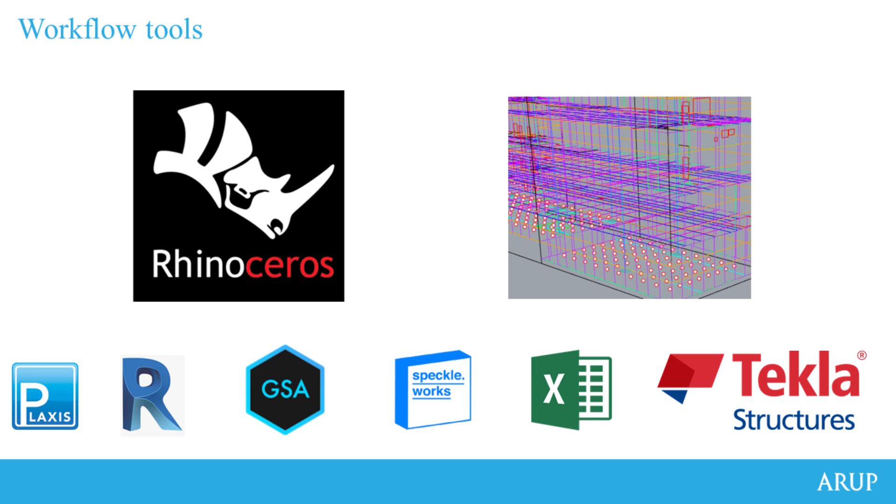Our Rhino model is going to end up looking something like this. The reason why we'd use Rhino is because for geometry operations, it's probably the simplest, most refined. It also has a lot of the parametric modeling that John's been talking about built into it with Grasshopper. And you can also do geometric calculations quite simply within Rhino. We'd be analyzing using GSA.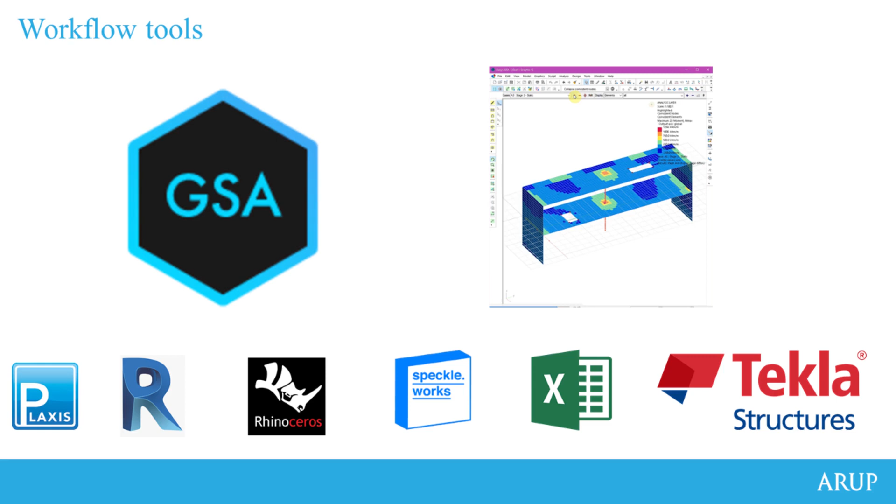One difference here is that we're aiming not to be doing any hard coding of parameters or any modeling in GSA itself. We're trying to set up our entire model outside of GSA, but also within our Rhino model, we're defining parameters that GSA isn't interested in, such as lap locations if you're talking about reinforcement, or cover. GSA isn't particularly interested in these parameters, but we're defining those in the initial Rhino model to use later on.

We were using Excel as our design tool, so that's doing the maths behind our code checks. Excel probably isn't the most ideal solution, but we have existing skills in Excel and existing tools, existing spreadsheets. So we tried to work that into the workflow. And ultimately, we're delivering our design documentation in Tekla.

Yeah, so essentially trying to generate a 3D model of our reinforcement. Unfortunately, yeah, we are delivering drawings at the end of the day, but if we have our 3D model, we can hopefully use that to interrogate, hopefully for additional purposes in the future.

So we've got all our tools that we're pretty sure we're going to be using, but before we actually start setting up this workflow, we want to actually map out how we're going to use each of these tools. And it's probably more about the linking between the tools. So we end up with a workflow that looks something like this. At its heart, this whole workflow is sort of revolving around Speckle, which is sort of an interoperability tool in our case.

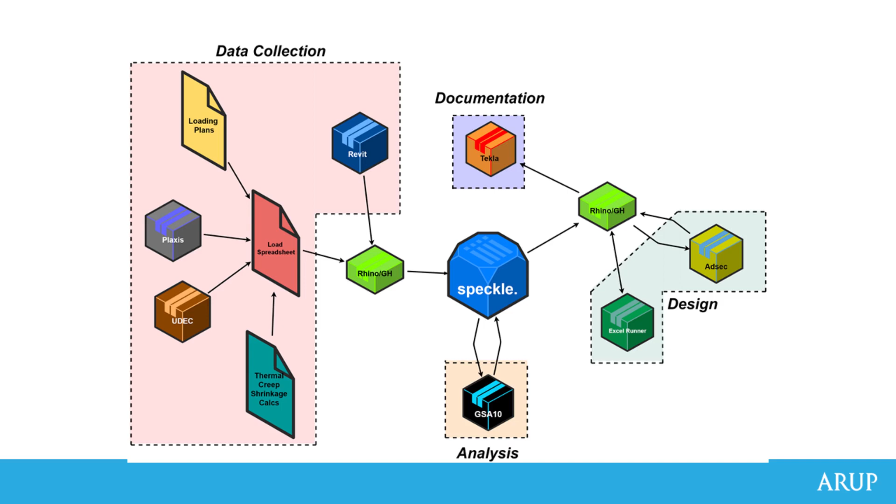So this is sort of a summary of what we're going to be doing. So analysis and design driven by a Rhino model, avoiding manipulation in GSA, sending our analysis results back into Speckle, and then reading it into Grasshopper to send to Tekla to generate a 3D reinforcement.

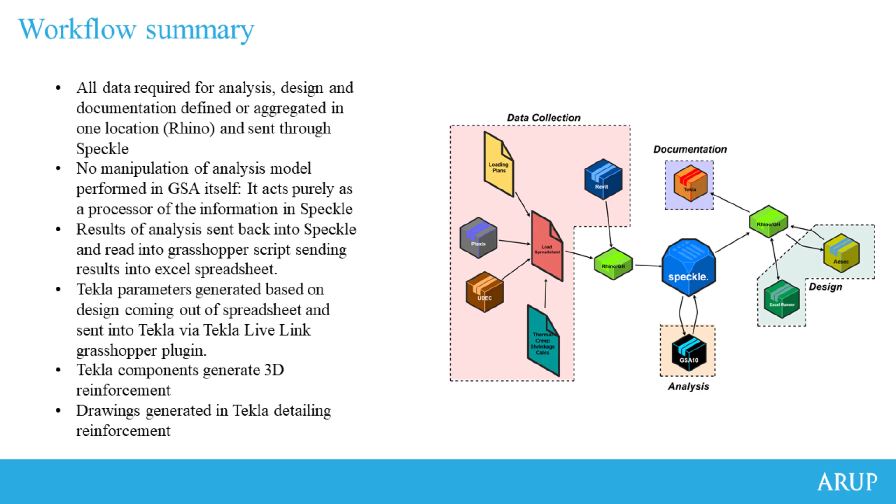So here's a couple of videos of some of this workflow in action. We've got our Rhino model, we're sending it into GSA, hitting go. Once it gets into GSA, we're not doing any manipulation within the GSA environment. We're sending the results out of GSA back into Speckle.

We're sending that to an Excel spreadsheet, which is doing our design, and then we're sending the results of that design back into Speckle, and then into Grasshopper to generate our Tekla model from the Tekla Live Link, which is ultimately what generates our drawings at the end of the day.

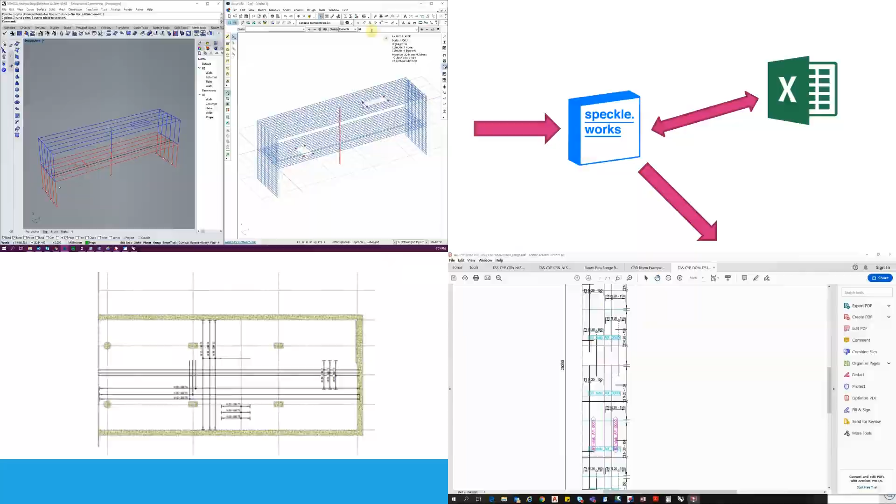So another advantage of using Rhino and Grasshopper is that we can actually visualize some of the inputs. So this is a bit of a lesson learned, where you've got a huge amount of data coming into the model. You need to interrogate that data, and sometimes the software tools that you're using are a bit challenging, or the options of visualization of that data are pretty tricky within those programs.

It's not always super flexible, so Grasshopper is actually a really good visualization tool at the same time, so you can actually be visualizing your input data and checking it before you're even generating it in your analysis model. So here I'm visualizing some earth pressures that are on this underground concrete structure. And then you can also do things like label the actual values, label how deep underground you are, which is quite helpful.

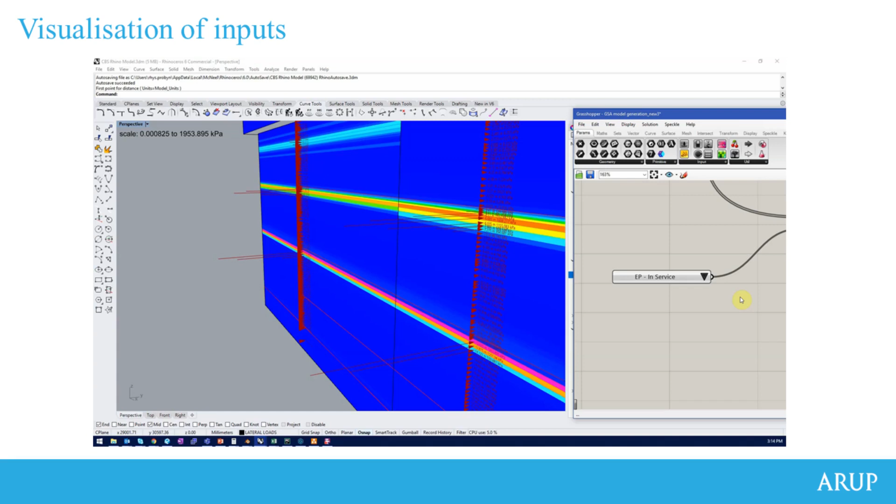But the advantage is that it's open source. So you can actually download the whole code base from GitHub and start making code changes yourself if you have any sort of programming experience, or if you want to learn a bit of programming. So this is a way people can start fixing bugs themselves. They're not relying on outside software development parties to fix their problems for them. Or alternatively, companies could start hiring programmers to start doing some of this development for the end user.

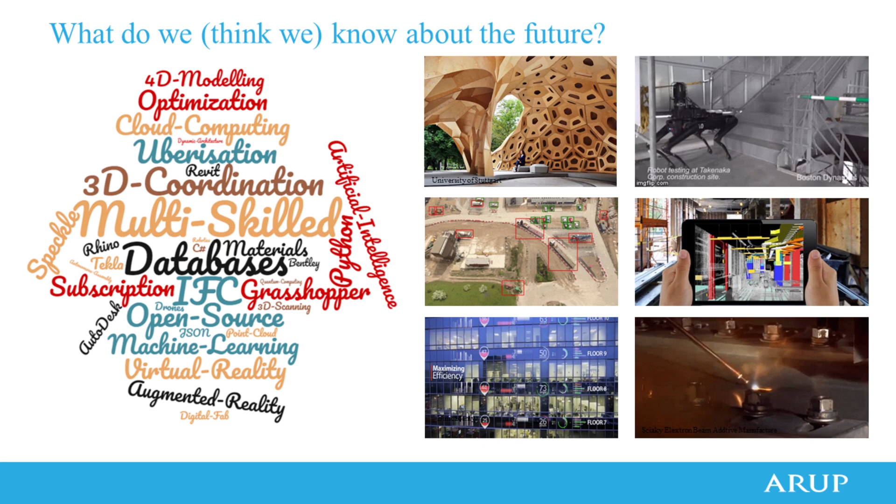Alrighty, second piece of audience participation. Hands up, everybody who considers themselves an honest person. Jesus Christ, a pack of liars in the room. Check your wallet before you leave. No, I think you probably all consider yourself an honest person, right?

And what is an honest person? An honest person is someone who likes the truth. And in our industry today, that makes us all very lucky because there are so many sources of truth, right? Take your pick. You've got the Revit model, you've got the latest IFC model, you've got the PDFs that have recently been updated on Aconex, or you've got that crappy little hand sketch that you did down at the contractor's office last week and lost on the way back to the pub.

Yeah? And all of those are probably going to contradict each other, all of those are going to give a different version or flavour of the truth, none of which are probably going to be quite right. And that just contributes to this mess of data fragmentation that we're all experiencing in the industry at the moment. Now, I think that it is inevitable that with time we default towards the 3D model. We're able to communicate so much more than we previously did.

John Legge, in his eloquent way, stole a phrase that I was going to use. If a picture's worth 1,000 words, a model's probably worth 1,000 pictures, right? We can communicate things in 3D that are nigh impossible to communicate in 2D images. And so until we completely transition, I think this data fragmentation is something that's going to plague us in that transitional period. But as John has given some examples of, we are working towards that, and you can see examples of workflows on different projects we have delivered where the model is king.

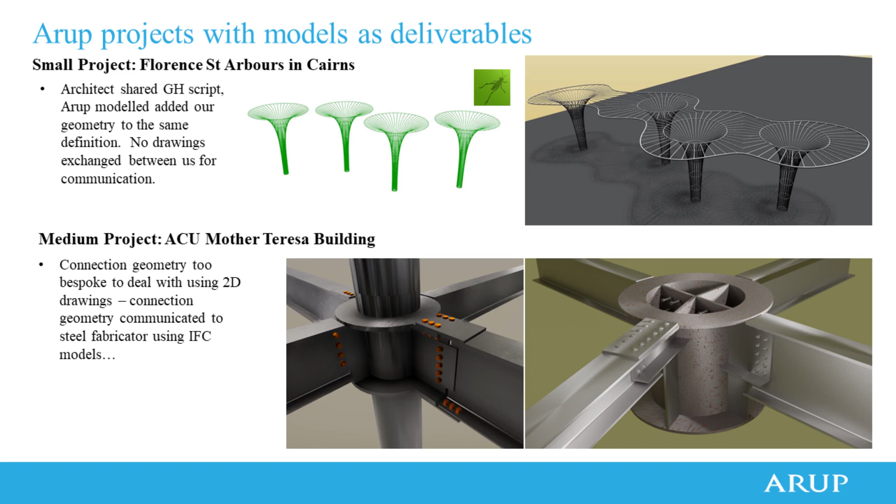So this is an IFC model. It's actually embedded in the PowerPoint and would give me a really nice effect if it would just kindly spin around. I don't think it's going to. But this is one of the fully welded truss nodes that we had for ACU. This isn't even the most complicated one. This is a fairly standard one. But again, the nature of the stiffening required on a joint like this, just too difficult to communicate with a set of 2D drawings. We really defaulted to the IFC model. And the IFC communicated this so efficiently, and it took a couple of hours to prepare as opposed to the drawings, which would have probably taken days.

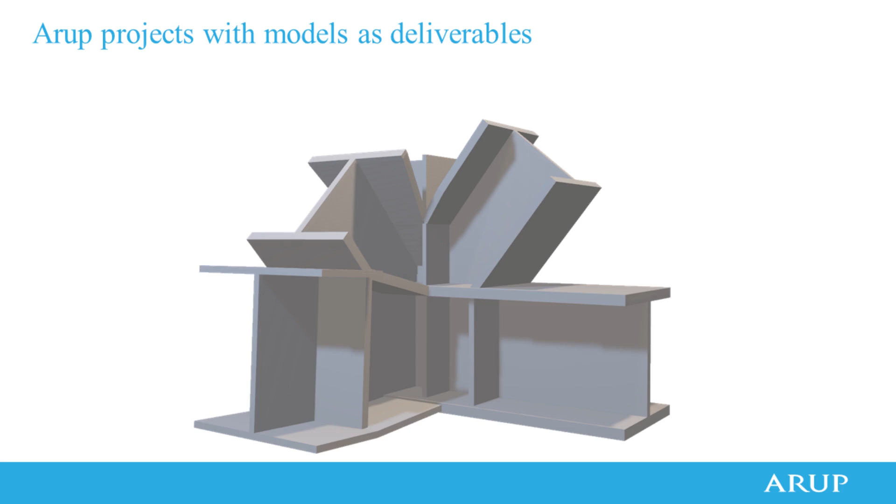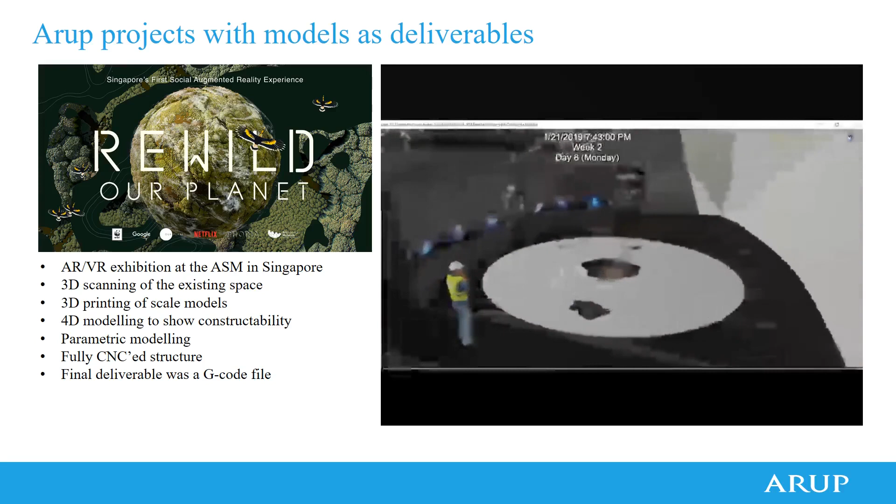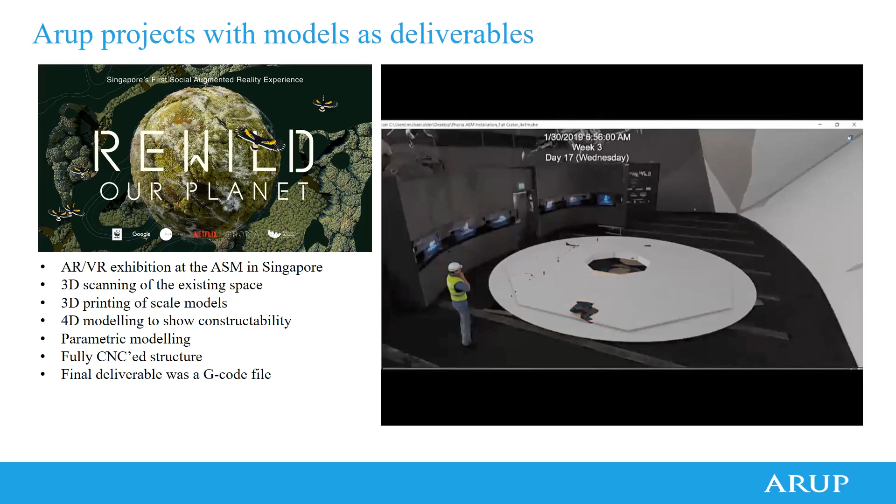I'm throwing this one in here, and I'm looking at Clayton wherever he is in the room. This one's kind of being held up as a bit of a poster boy project at the moment. I wouldn't say we were showing off, but it was testing our digital capability. I think that's probably a fair description. So this was an exhibition held in the ArtScience Museum of Singapore. John Legge showed you some beautiful images of that structure just before. It was done in collaboration with a group called Phoria, who are experts in the AR/VR space, and they prepared this amazing state-of-the-art presentation, which was an augmented reality experience for the attendees.

Now, Arup delivered a structural design and the acoustics design for this project, and we, I'm not sure if it's going to play or not. No, it doesn't look like the video is going to play.

We actually scanned a 3D point cloud of the exhibition space that we were preparing the stage for. So we had a 3D model of the exhibition space that we were going to be placing this platform and this exhibition inside. And then we used parametric modelling and algorithmic design to prepare several different options and situate them within that 3D point cloud model to communicate what those would feel like in the actual exhibition space to the designers of the experience.

When that wasn't enough, we 3D printed scale models of some of the options, and those 3D printed models were actually constructible models, so the designers at Phoria could actually put the stage together themselves and see what it would look like and how it would all connect. And then we did a 4D modelling sequence showing how we intended the contractors on the actual day of construction to put the thing together. If this would play, this would be a really nice graphic of that.